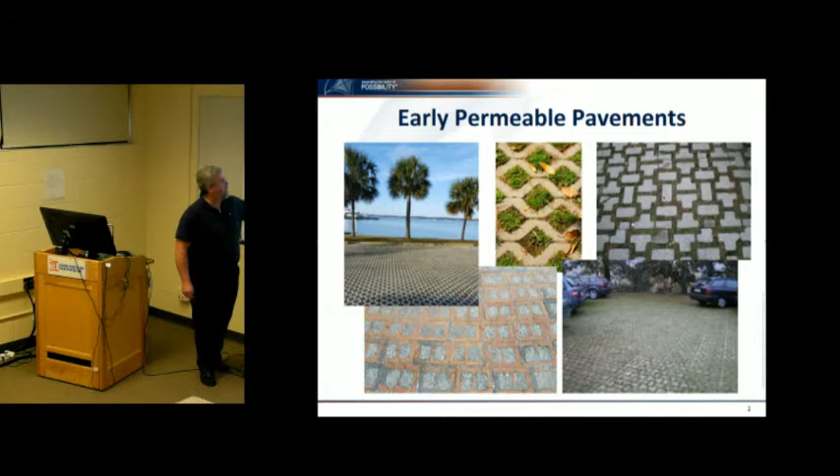Well, the stormwater industry primarily is the one that's interested in permeable pavement systems. It's not something new - it's been around for a long time. The first permeable pavement in North America was built in the early 1900s in Nova Scotia, Canada. There's been quite a wide variety of different kinds. This looks like concrete blocks on their side - this came from a hotel in Italy I was staying at once. All of these pavements are designed to allow water to go into the pavement instead of having it flow off the pavement structure. There are the primary pavement types of this in North America.

Really, you'll hear pervious concrete, porous asphalt, and permeable interlocking concrete pavements. They're basically any pavement that allows water to go directly through the pavement structure and into the layers below. It's not like the porous asphalt we put on top of a pavement structure as a thin layer, like you see in Florida where you're driving down the highway - water goes in the top and out sideways. These are pavements where water goes directly through the pavement structure into the materials below, including the subgrade, and we infiltrate it if possible and do things to help treat the quantity and quality of water. Permeable pavements basically have a surface structure that's permeable, and all the layers underneath are also permeable.

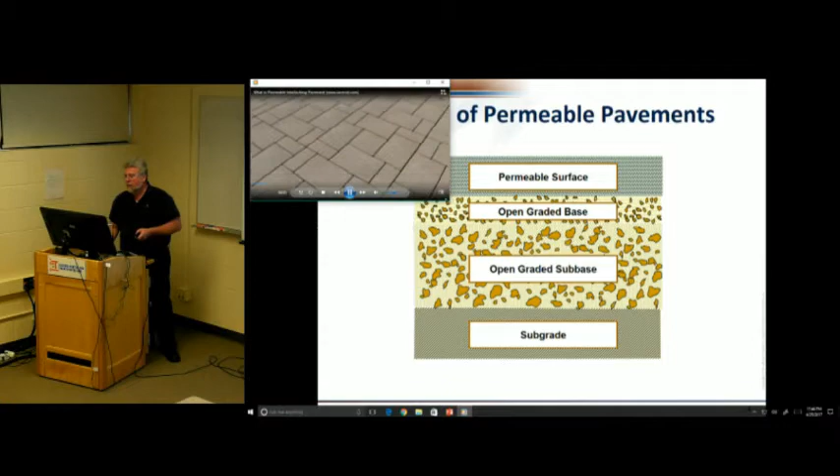So what happens when water flows on top of these - let me make this a little bigger for you - is that water flows across the top of the pavement, goes into the spaces between the paving stones in this case, or the porous asphalt or pervious concrete, ends up at the bottom of the pavement structure, and then we deal with that water through our normal design process and procedures.

We take away the small portions of the aggregates, leave it very open, 25–30% voids. We sometimes put fibers and fillers in there so we get more glue to stick the aggregates together, and then ultimately all the water goes into the pavement structure.

Here's a picture of a housing complex in New Hampshire. The University of New Hampshire has done a ton of work on porous asphalt pavements and water quality measurements, and you see a lot of these in subdivision roadways and pathways and whatnot all over North America now.

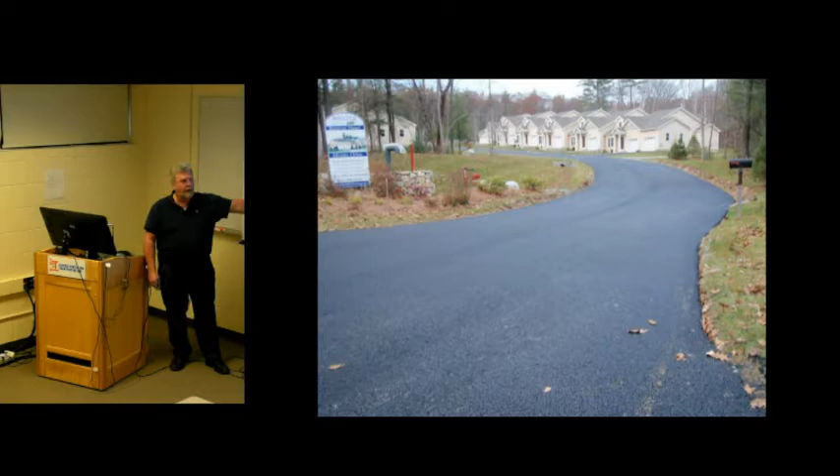Pervious concrete is basically the same thing. We make concrete, we make it as dense as possible to be as strong as possible, unfortunately not very permeable. So what we do is we take out the small aggregate particles from this.

We have additives in the concrete itself to hold water as well. If it's a hot sunny day, lots of wind out there, not a good time to be placing a pervious concrete pavement. This comes from one of the largest installations of pervious concrete in North America down in Williamsburg, Virginia.

They took a big outlet mall complex, and there are no catch basins in the entire complex, the entire area. They basically removed, this used to be a stormwater pond right here. Underneath here are these big milk crates, I call them, that are big open spaces that store water.

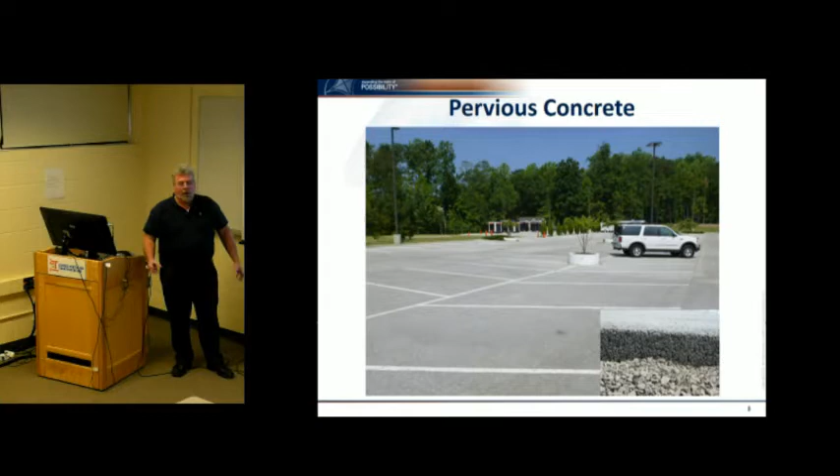All the water from all the buildings in this entire outlet mall ends up back here with a small outlet down the back here that allows it to go into a stream behind. If it doesn't get into the ground, it goes into the stream behind there.

And then we have permeable interlocking. There are varieties, tons of varieties. There's 30, 40, 50 different kinds of permeable paving stone systems. This is not permeable. The space between the stones themselves is where the water gets into it. So we've got about 90% solids and about 10% open space between these paving stones.

There are some of these that are actually made from pervious concrete. You got a question? Shoot. Yep.

The base is completely open as well. So we've got basically 25–30% voids in the base. And do stop me if you got questions as we go along here, just stop me, okay? I'm more than happy to stop and answer questions.

Another variation of this is from Colorado, Fort Collins, Colorado. They use a lot of these. They've got specifications actually that require all new construction, 25% of that surface must be a permeable surface. So it includes parking areas, roadways, everything else in the entire city.

This comes from a brewery. They're very, very sustainable. There's no water that leaves this site. They basically infiltrate the water through this. The big beer trucks that carry the beer cases and kegs leave out through this roadway here.

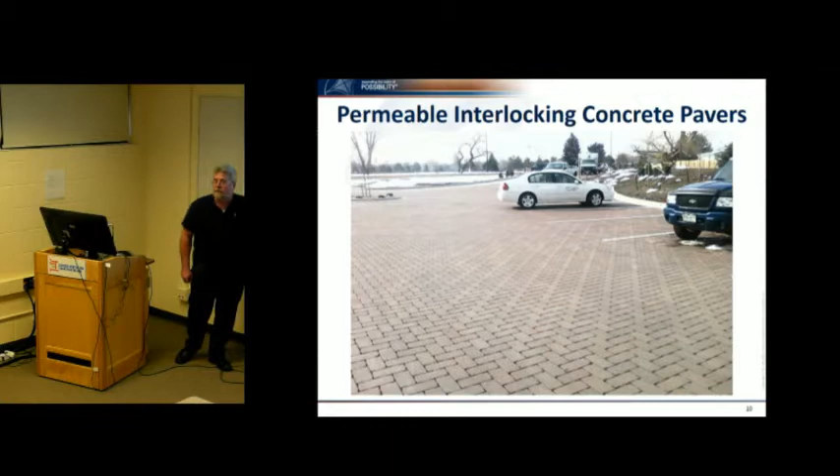And so this was built probably 8 or 9 years ago, I think probably now. I've seen it quite a few times out there.

Advantages: no trenches underneath to compact, no trenches to settle, easier to build. All the water basically from the roadway gets infiltrated into the ground, and water comes from here as well, off the top and into the pavement surface. And so we have to take care of that as part of the design, which I'll be talking about.

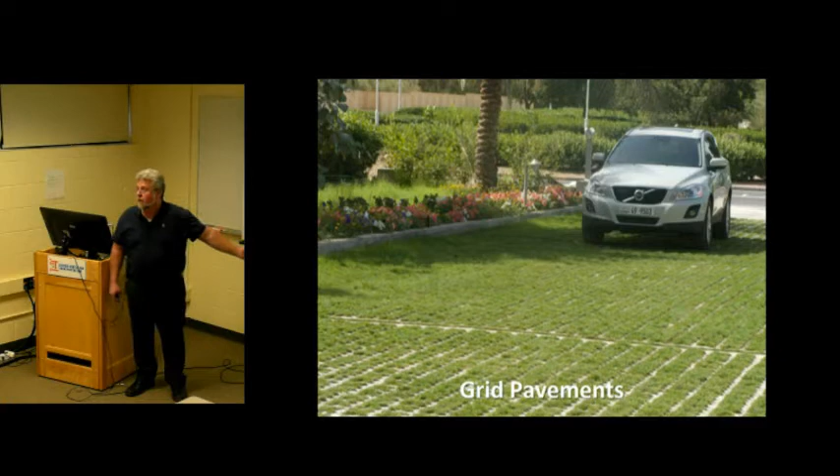And then there's a lot of other ones like this, grid pavements. These are the old daddy of kind of permeable pavements. Because it's green does not mean that it is permeable. Under here, if we've got a little bit of topsoil and some clay soil below it, it will not infiltrate water.

It's virtually impermeable. Just because you see something that's green does not mean that water can get into it. But a lot of people still use some of these systems, basically the old ways.

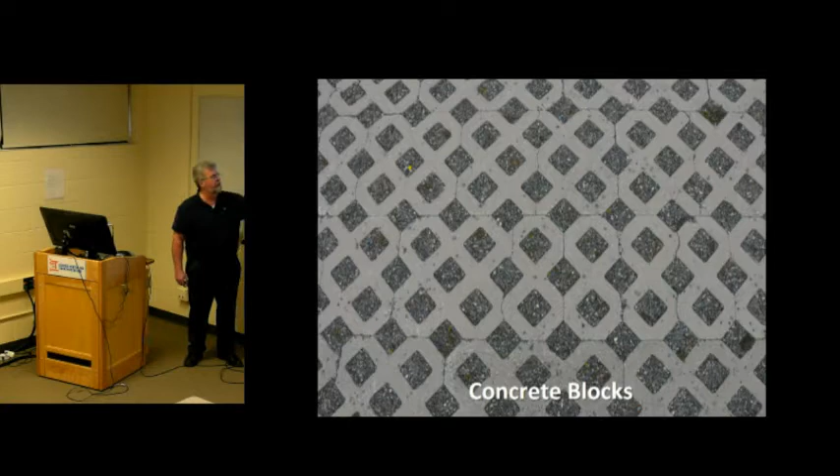You could take a box of these, and all of us here could probably in 5 minutes cover this entire room with this stuff. Once it's connected together, you cannot get it apart, it's impossible to actually separate it. So you can drive on it, you can plow snow on it, all kinds of other things. This is aggregate in the middle of it that's providing permeability to it.

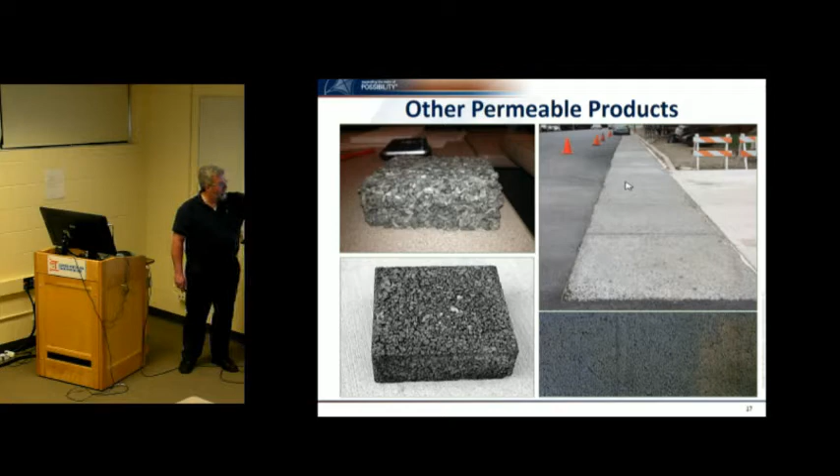There's a variety of other kinds of products, epoxy-coated aggregate materials. There are actually poured in place and precast versions of this. Some guys up in Maine and Vermont are doing a precast version of this pervious concrete and just laying it on the side of the roadway to connect it up to the drainage system. There are tons of different kinds of these things out there, some better than others. I'm not thrilled about these kind of things because when you put the blocks together, they rub up against each other and cause some of the aggregates to move up and down a little bit.

Typical application of permeable pavements - this is not on a highway. These are typically parking areas, driveways, recreational trails, things like that. Parking lot is a very common use of these permeable pavers. This is from a Lowe's facility down in North Carolina near the Outer Banks. Their entire parking lot area is basically pervious concrete.

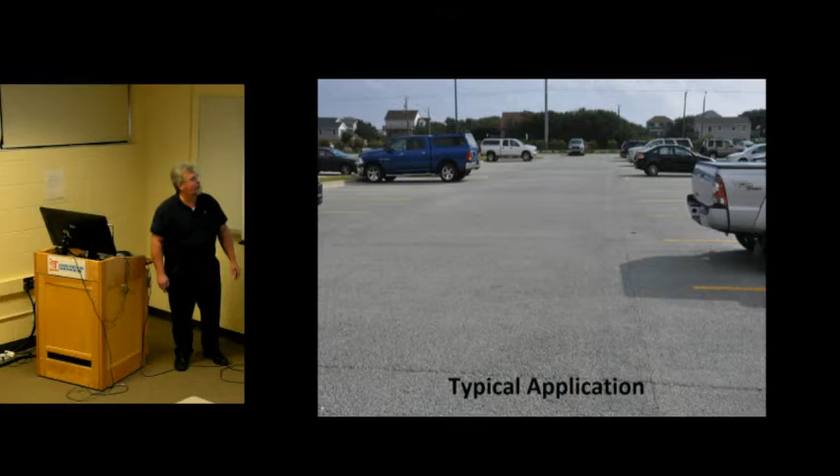You see a lot of these being used in places where you've got sandy soils, soils that have a high hydraulic conductivity, where water can get into the soils. So if you put this on top, think Outer Banks sand kind of deal, you don't need catch basins because all the water will be infiltrated into the ground below it, which is the desire of this entire pavement system. The challenge with these is getting this down uniform, making sure it's properly compacted, making sure it's properly hydrated, or what happens is you get rattling happening. So you turn your tires like this on your car, you pop out pieces of aggregate, and that can cause some issues.

Keys to a successful project - ultimately these are not suitable for everywhere. I'm constantly dealing with landscape architects and people who say, oh, I want to put permeable pavement in here and I want it to be subject to bus transit traffic. And I said, not a good idea.

I've got a project right now on the Gordie Howe Bridge, a new bridge between Canada and the US up in Windsor and Detroit. The architects sent us the plans for the parking areas and the heavy truck zones, and they're all permeable pavements because they want to be sustainable. Well, I'm the guy that says, bad idea, you shouldn't do that. So we need to look at the sites and what conditions are there to determine whether or not it makes sense.

Then we've got two things to deal with: strength and hydraulic design. We've got strength, we have to make the pavement thick enough to handle the loads, like any pavement design. And we've got hydrology, we have to figure out how to get the water in, and then what do we do with it once we get it in? Does it go into the ground? Do we have to deal with it elsewhere? Do I have to get some of it leaving the pavement structure? How do I do that?

It's not rocket science. This is not really complex to do. It's easy to write specifications, but it's new. It's new to North America, mostly probably the last 15 years or so. In Europe, they've been doing it for 40 years. But what happens in North America is I do a job in Boise, Idaho, and I see their specs, and I say, where'd you get the specs? Oh, I got it from Orlando, Florida. I went to Google, whatever porous asphalt specifications. And they just take it and put it in a project and want to build it there. Well, the conditions are not the same. There are really good guide specs from the industry out there. People stealing things off of Google just leads to a lot of problems after the fact.

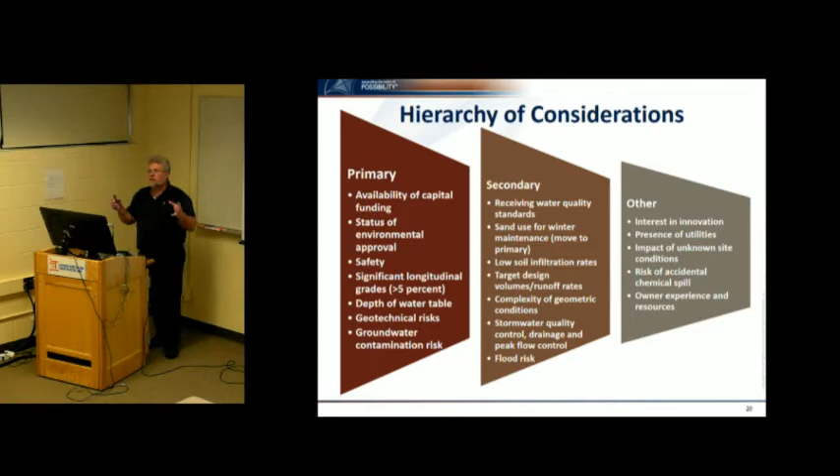So we came up with something like this, which is modeled after actually a matrix in the AASHTO design guide that talks about primary, secondary, and other considerations for a decision-making process. And we've listed here all the things that are important to a permeable pavement, including things like geotechnical risk, depth of water table, environmental approvals, and volumes of water and things like this. And we've taken that and turned it into a matrix. Engineers like matrices and spreadsheets and things like that. So these are kind of telling people when they should and shouldn't do something particularly.

So this is the matrix that came out of that, which was a decision tool to determine if you could consider using a permeable pavement for a highway shoulder on the side of the roadway.

We had our primary, secondary, and tertiary considerations, and we put weighting factors on all this. At the end of the day, it gives you guidance as to whether or not you can build a permeable pavement in a particular location. This makes the engineers happy, and it's something we can use to explain to councils, city people, designers, and architects why a site may or may not be a good candidate for a permeable pavement structure.

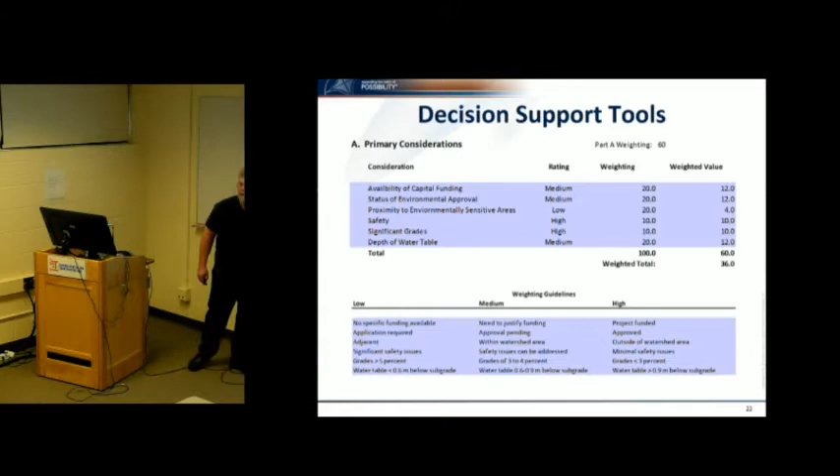Here's a blow-up of a couple of the slides. We've got a weighting scale, and guidance that tells you what low, medium, and high risk means—for example, if you've got a grade over 5%, it's low risk, et cetera. So it walks you through the decisions, and you decide whether or not it's a good idea to build a permeable pavement there. Then we score them all: primary, secondary, other. In this case it came out with 65.6 out of 100. I think 75 was the criteria for a yes, that it works well, and it gives you an idea of whether or not you should do this.

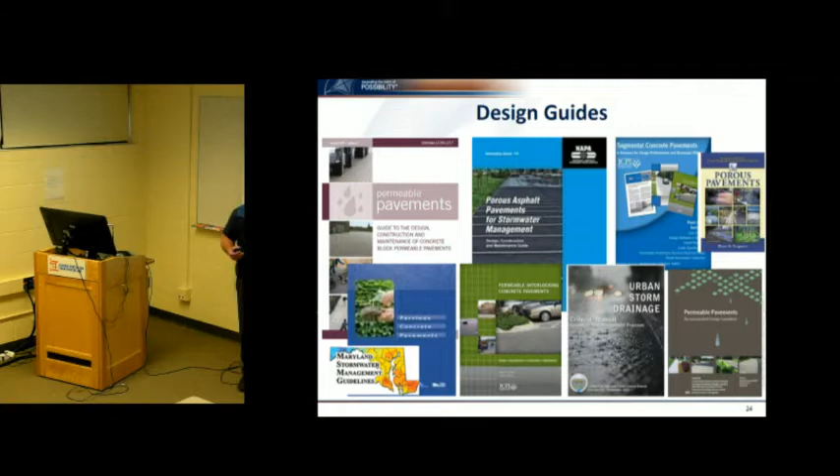There are tons of guides out there about permeable pavements—industry guides from the concrete industry, the paving stone industry, groups like ASCE. This one is from the Environmental and Water Resources Institute of ASCE. They got a bunch of really good people together and came up with a high-profile manual to give guidance on the design, construction, and maintenance practices of permeable pavements. So there's lots of stuff out there to help people understand the do's and don'ts of permeable pavement design.

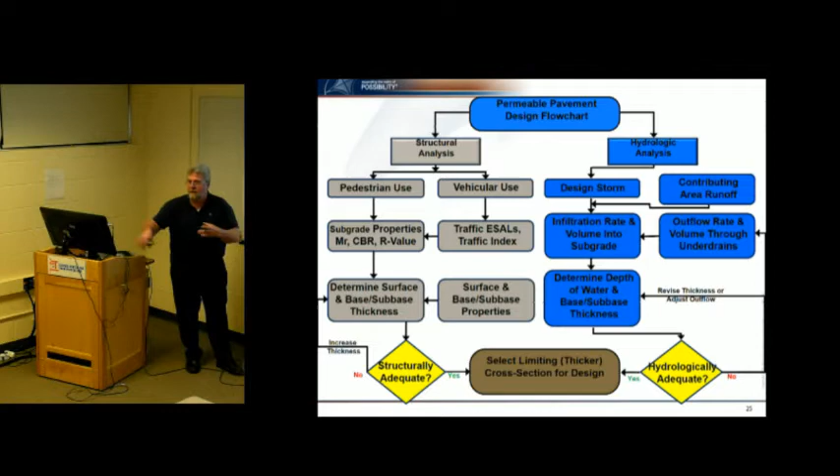This is the basic process. What we're looking at here at the top is a design flow chart with a structural side on the left and a hydrologic side on the right. The structural side is very similar to building a conventional pavement with a few twists. The hydrologic side means, in addition to making it strong, I have to make it so I can get water into the pavement and decide what to do with it once it's there. Ideally, when you get to the bottom, you have a pavement structure: here's how thick it needs to be to handle the traffic, and here's how thick it needs to be to handle the water. So maybe I need a thicker pavement for traffic than for water, and I want to optimize this. The best pavement is one that's just thick enough to handle the traffic plus just thick enough to handle the water, at the least cost. That's basically our goal in designing these systems.

There are a whole bunch of inputs. I won't go through them all in detail, but the first thing I ask people is: why do you want to build a permeable pavement?

A good example was Thompson, Manitoba—think up by Hudson Bay, about 1,000 kilometers north of the American border, north of Minnesota. It's a school, a university campus, and they wanted to build a permeable pavement. So I asked them, why do you want to build a permeable pavement? They said, we want to be green. Okay, that's nice, so let me explain where you are: you're in Thompson, Manitoba. It doesn't rain here—they're in a northern winter desert kind of climate, getting barely any rain a year. I asked again, why do you want to do this? They said, because we want to be green. Okay, fine, you want to get LEED Silver certified—that's fine, whatever you want to do. So I told them you're not going to get any water into the ground because the ground is sloppy, nasty clay material—it would take 100 years to infiltrate that much. So I asked, can you design this? Of course I can design this. So what are you going to do? I'm going to dig a giant hole in the ground and fill it full of rocks, then take all the water that doesn't get into the pavement and put it in that big hole.

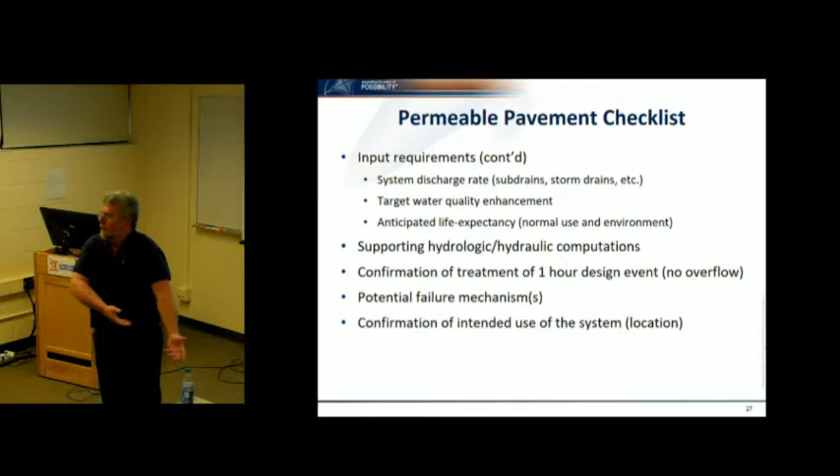If we're sending water out, what are we trying to do with it? When you drive, you got water that's moving. So if I take this bottle of water and put a bunch of dirt in it and shake it, it's going to be nice and brown. I sit it here, and stuff's going to start falling out of solution. You've got particles in the water. Gravity works, right? The longer I leave it sitting there and not moving, the more stuff is going to come out of solution. So I'm taking care of what's called the total suspended solids. But if this water is moving, it's always going to be dirty. So the whole point is to get the water to slow down and get the suspended solids out of it.

There are guidelines and rules here that talk about what's called first flush. When it rains, you've got to take care of the first inch of water and not let it leave your site. So there are rules that say every time it rains, the first inch of water -- if it's a half an inch, it's got to go on the ground. If it's an inch, all on the ground. If it's an inch and a half, an inch has got to go on the ground, and the other half we can send someplace else.

So there are guidelines -- everybody's got guidelines, everybody's got something different right now. It's driving me crazy because there are so many different kinds of guidelines from different agencies with different goals. There are no real central goals.

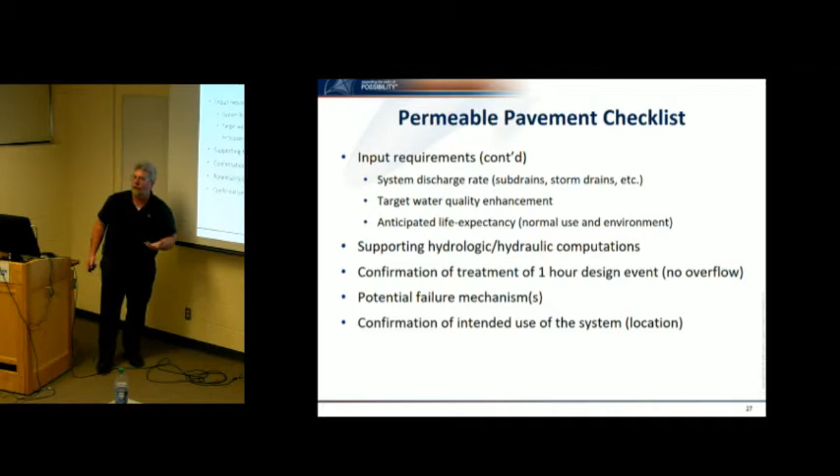Geometric details, all kinds of other things here. We want to know, is it flat? Is it curved? Is it stepped? Is it an alleyway? Does it go down 5% slopes? Do I need drains underneath this? Are there curves in it? Are there utilities I have to deal with? All of these things are part of the geometric design and details. Is there frost? Is it cold? Is it going to heave or not, potentially? All of these things are important.

And if I've got contaminants I'm trying to take out of the water as well. Then there's things about how fast does the water go into the ground. If it's sand, like this -- if it's clay, really slow. I can make it go faster in clay if I want, by roughing it up and making trenches and boreholes and things like that.

Clogging the surface -- so I've got an open structure and a bunch of pine trees dropping needles on the pavement surface. Are these going to eventually clog up the surface of the pavement? Well, we designed for this stuff so it doesn't affect the bottom end at the end of the day. So basic steps here: evaluate, can I do this? Does it make sense? Two, why am I doing this?

Let's talk about the benefits we can potentially gain from this. Most of these are environmental, most are stormwater related. The bottom line is there are so many things, if we deal with stormwater at the source and not at the treatment plant side, we're saving a ton of money. If I'm reducing the size of my stormwater ponds, reducing the amount of water that goes to a stormwater plant for treatment, reducing the water sitting on the pavement surface so you get better visibility and less water spray, there are all kinds of benefits associated with permeable pavements that are not pavement related, but rather water related, at the end of the day.

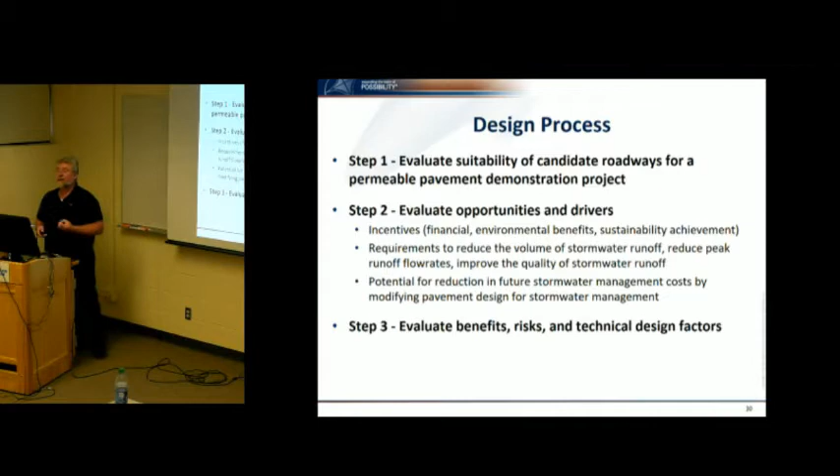All those considerations I talked about, the primary and secondary ones, this is what we do. This is from Berkeley, California. The council in Berkeley asked us to do a permeable pavement design demonstration project. They said, here's 8 candidate roadways, and I want you to pick one of those 8 and we're going to build our permeable pavement on it. So the matrix that I had was adapted for Berkeley, California, since they have different needs at times.

We went out and looked at each of these locations, looked at the cross sections - these were all existing roads they wanted to turn into permeable pavement, basically rehabilitating the road, digging it up. We looked at the areas around - what's on the sides, are there trees or other roads dragging water to the pavement surface? What's under the ground? If I've got old utilities under the ground, I probably don't want to use them for my demonstration project, because if I get a water main break or something, that's not a good plan - your demonstration project's going to go up like crazy.

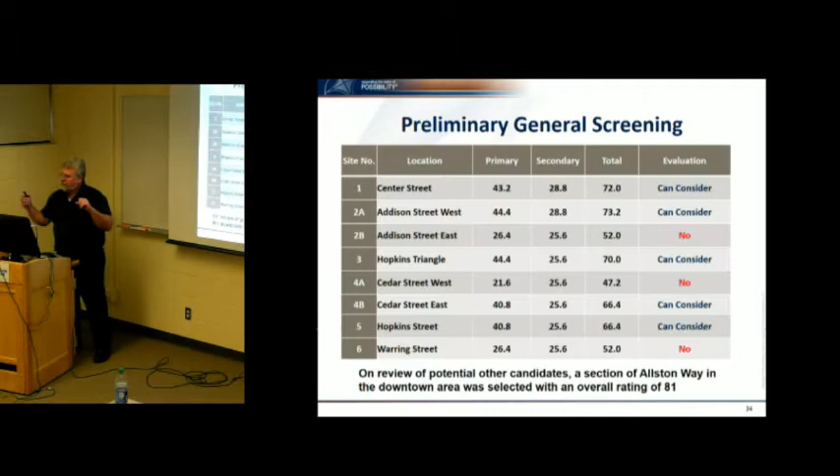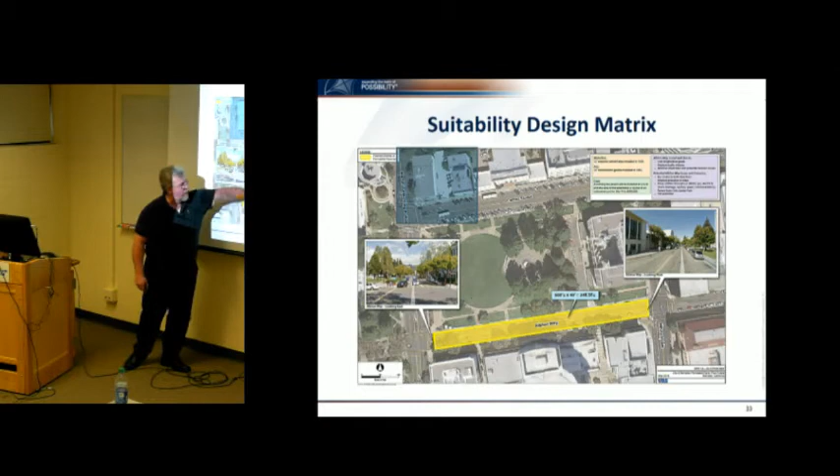So we look at areas and where the water's coming from, and others like this one - we took all 8 of those locations, put them through our matrix. All 8 of these locations they picked ranked in the 40s to 60s - not really something we could consider. So they came back and asked why. Well, because there were all these things wrong, and we explained why, gave them all the details - one's a major bus route, one's got tons of dirt coming in from a construction site, and things like that. So ultimately we ended up picking Allston Way, near downtown Berkeley. It's got lots of area that dump water onto the pavement, but it met basically the rest of the criteria, giving it a relatively high rating of 81.

So that's what they did - we said okay, good, we're going to build Allston Way. This is Allston Way. We have to look at the water that falls on the roadway. These are sidewalks against the school - all the water there goes this way, and this part of the water here goes this way. So I have to build this permeable pavement to handle all the water coming into the road from different locations.

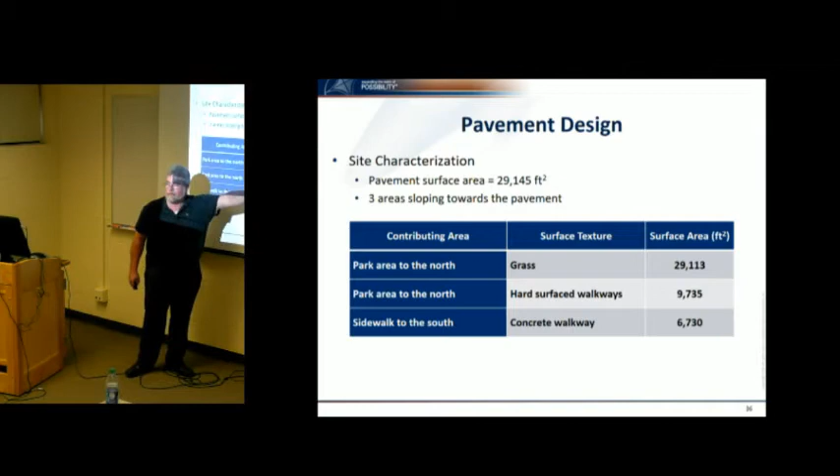So we go and look at this, and those are the contributing areas - these are the additional areas. We've got the pavement area, 29,000 square feet, but I've got 29,000 square feet of grass contributing water, 10,000 feet of hard surface walkways, and 6,700 square feet of other concrete walkways. I've got to deal with all that water - it's not only going to take the water that falls on it, but also all the water that comes off of it from the areas around it. Remember, grass doesn't mean it's going to infiltrate water - it doesn't go in, it goes off or it evaporates, and that's where the water goes here. So we have two tracks basically: a structural track and a hydrologic track.

Let's talk a little bit about the structural track.

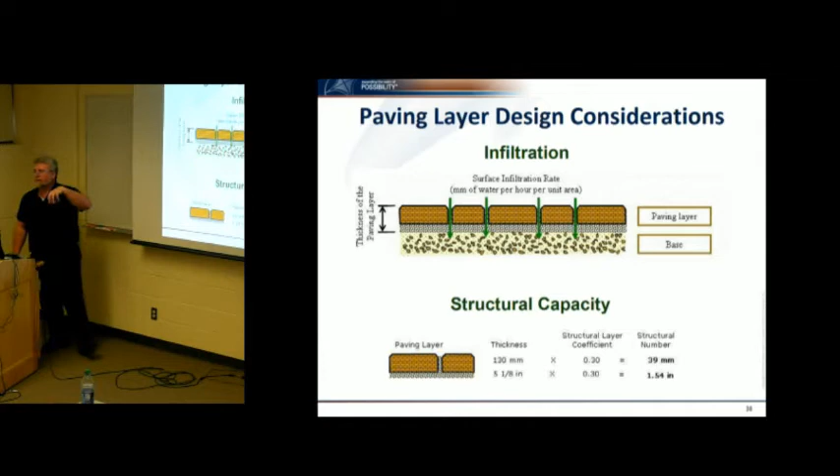We need to get water into the pavement, so we need to use a permeable surface. In this particular case, it's paving stones, and the spaces between them let water go in. On the structural track, I need to come up with a structural design, which I'll go through in more detail further on.

To determine if we can get water in, we test other pavements to know what the permeability is. I've got a project starting in a couple of weeks with a manufacturer of paving stones building about 10 foot by 10 foot square areas of 8 or 9 different kinds of permeable paving stones. We do an infiltration test, a permeability test, using plumber's putty and a known ASTM standard - there's one for concrete, one for paving stones - where you dump water in, time it, and find out how fast the permeability is. Something like that will be roughly 4 feet of permeability an hour going into the ground.

It doesn't rain that much. The highest rainstorms in a 100-year storm in the U.S. are roughly 12 to 14 inches of rain in 24 hours, not in an hour. So these pavements are massively permeable.

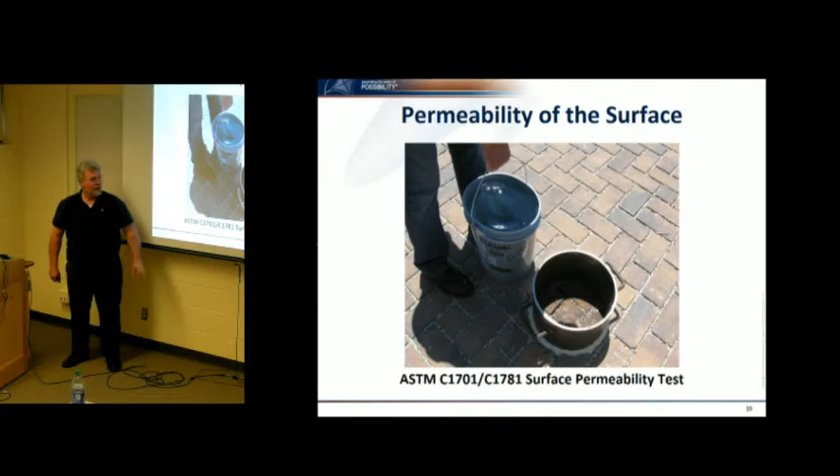If you don't have real pavements to test, we build stuff in the lab - a permeable pavement system. We pour water on top and simulate clogging by getting grad students to dump dirt on there with toothbrushes and work it into the joints, all those wonderful jobs you get at a university. This is at a university, by the way.

We do permeability tests and look at the change in permeability over time. As I try to clog it, it goes from say 200 inches an hour down to 190, 180, and usually it clogs asymptotically flatter around 90% loss of permeability, so around 10% of the 200 inches I started with. So over the next 25 years I expect to lose permeability - that's okay, I designed for this. I get 20 inches an hour, which is way more than needed for the biggest design storm in North America, so that's not an issue.

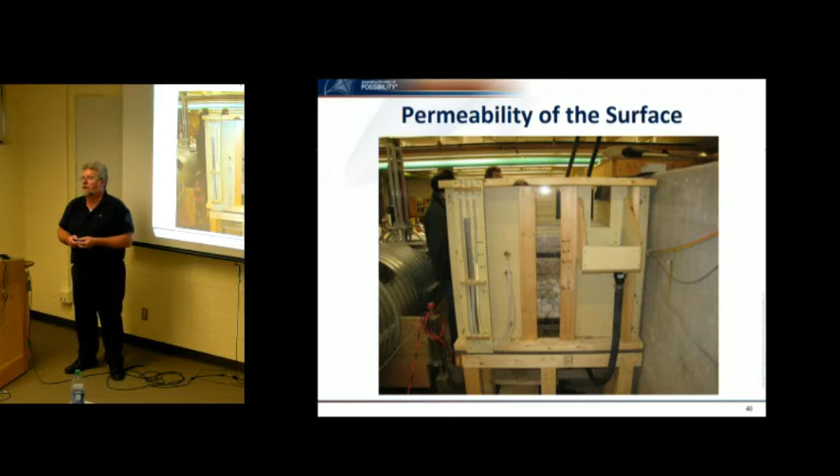We look at the permeability through aggregate materials and do a mix design. People have done work on mix designs in asphalt and concrete - well, we can change our mix design. This is something people don't do enough. Why have a massively open aggregate structure if I only get 4 inches of rain a year? If I'm in Lubbock, Texas, I do a different mix design than if I'm in Houston, Texas. We change the mix design - I can give up some permeability to get more structural capacity, a higher modulus, and it makes more sense because it lasts longer. It's a give and take relationship.

Hydrologic design: water goes in, water goes out. Water comes down from precipitation, and we get water from surrounding areas like the parking lot and the park we saw. Some evaporates, some runs off the surface, and a lot hopefully goes into the pavement structure. If we get it into the ground, that's really good. If we can't, the water builds up and we need to get rid of it - we don't want it filling up over the top of the pavement. So we want to control it. Most agencies specify that when water gets into the permeable pavement, you can only keep it for 24 to 72 hours.

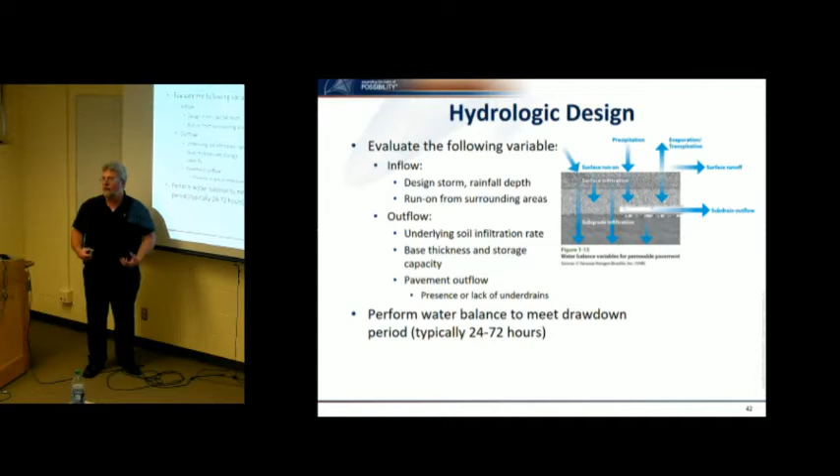They don't want water sitting someplace where you may have mosquitoes potentially growing, and ultimately you want it to flush out of the pavement structure. Delaying it by 72 hours is huge when it comes to storm events and water downstream and things like that. So that's the basic goal from this.

We call this the reservoir course because it's where we hold water. This has porosity of 30 to 40%, let's call it 33%. That means I can hold 4 inches of water with every 12 inches of aggregate I put in. So it's 33% air voids, meaning I can fill it up.

Ultimately, we need to know about the ground, the subgrade soils. How fast can I get water in here? If it's raining on here and it comes to here, what do I do with it? How fast can I get it into the ground? If it's sand, like this. If it's silt, slower. If it's clay, it's going to take a long time to get into the ground.

So we have 3 basic kinds of designs. We have what's called full infiltration.

No, I'm just not going to answer that. The phone's ringing. It's okay, don't worry about it, it'll stop.

Anyway, so we get full infiltration. This means we're trying to get water into the ground. All the water that goes in the top has to go into the ground.

This word I absolutely hate as an engineer, when the architects want an uncompacted soil.

What do you do when you're building a pavement? Beat the crap out of the subgrade so that we can make it work. I don't know how to hang up on this thing, but hang up. Ignore—oh, that was obvious. Need an engineer with a PhD to show me this, eh? I know, I know, sorry man.

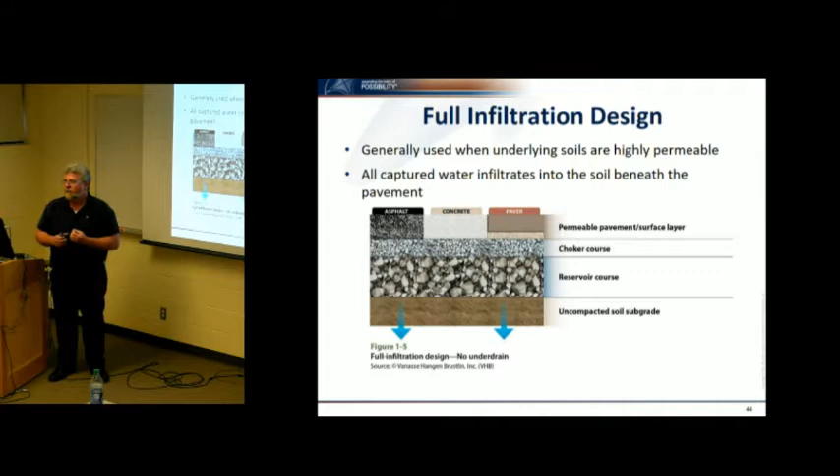You can build infiltration trenches. You can do holes, you can do that big hole I talked about up in Thompson, Manitoba, and things like that to make it work. So there's no need for this kind of stuff.

Full infiltration design, those are just the formulas of water stuff, and I'm not going to go through that. There's a new standard coming out from ASCE. I've been the chair of this committee for 4 years now, and we're finally going to get into the last steps of issuing a design standard to the public, which has all of this stuff and details in it.

So it's basic water analysis, looking at the total volume of water, where it's coming from, how it's getting there, and then making sure that we don't leave it in the ground too long. The ASCE standard has all of this detailed examples and stuff of how to calculate it as well.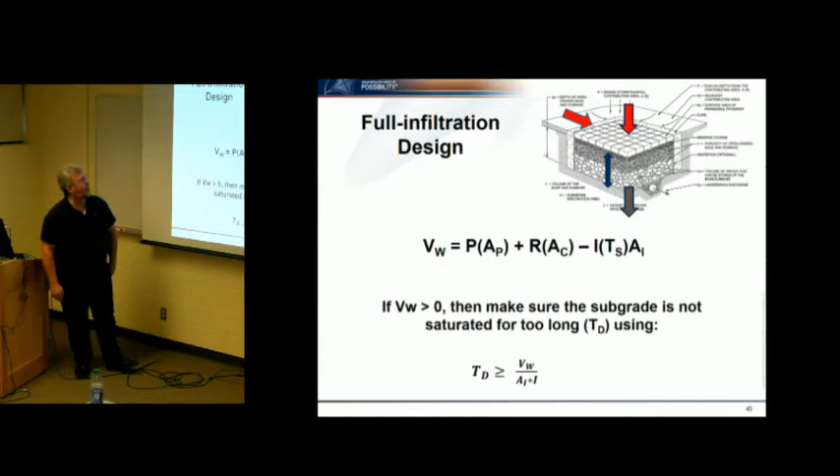Then we have what's called partial infiltration. Partial infiltration is basically where the water goes in, we get some going into the ground, but it doesn't all go in, it can't all go in.

So if water builds up, at some point in time we want to take it out. Usually we don't bury this guy in the aggregate, we bury this guy in the subgrade, and then to control the height, I turn the pipe up and I leave the outlet higher. So it builds up until it gets to the outlet height, and then eventually it comes out of the pavement structure. So this is a little bit more detail, I'll show you a couple pictures of that a little bit later.

Then so the partial infiltration design, same kind of thing. It's about water balance and where the water's going and how much water we store here. At what time do you actually let it go into the pipe and leave the pavement structure?

I said I don't do it here. We usually put the pipes down here so they don't have to. If you do it in the middle of the aggregate and construction, you've got a chance of damaging the pipe, so we don't want to do that.

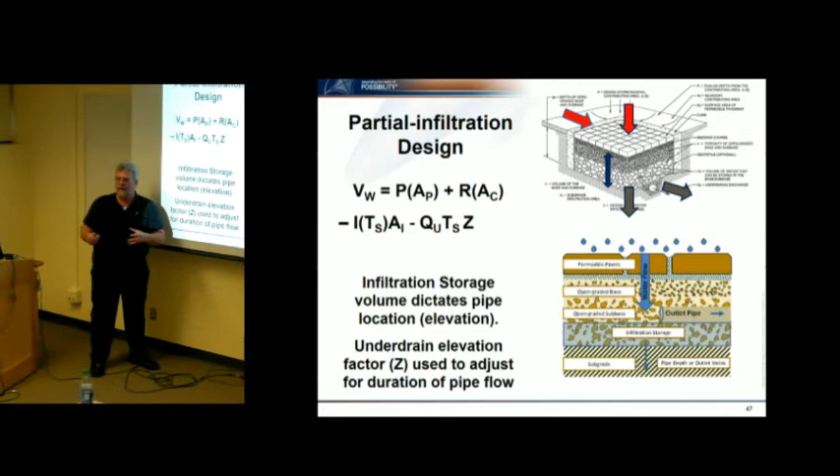Then we've got a no infiltration design. This is popular for brownfield sites, areas that are contaminated where you don't want water in, or places like Texas and Oklahoma where the soils are very susceptible to moisture changes and will actually heave based on moisture changes. Or quite frankly, if you want to save the water and use it to water the plants.

A lot of people will do these designs because they're into water capture. You basically capture the water in the pavement. Usually you'll have a cistern and a pump downstream so you can pump the water out and use it to feed the grass and plants and all that kind of stuff - gray water reuse. It needs a drain to get there, some way to get to the cistern and things like that.

So this is the no infiltration design, and the equations are pretty simple for a no infiltration design as well. I won't go through the details with respect to time and whatnot.

So then what you've got to do is, okay, I know how to do the calculation of water, where it goes in and out. I need to still do structural design, but we do things like defining the area of our permeable pavement, what size it is, and then look at all the contributing areas - the park, the concrete sidewalk, the other sidewalk - and look at, if this hallway is my contributing area, how much water is going to land there?

What kind of surface is it? Is it rough or smooth? Does it have a slope on it? How long is it going to take for it to come through that door and get onto my permeable pavement? So I need a water balance, right? And I do that for grass, which is different than asphalt, different than concrete, different than trees and all the rest of this stuff.

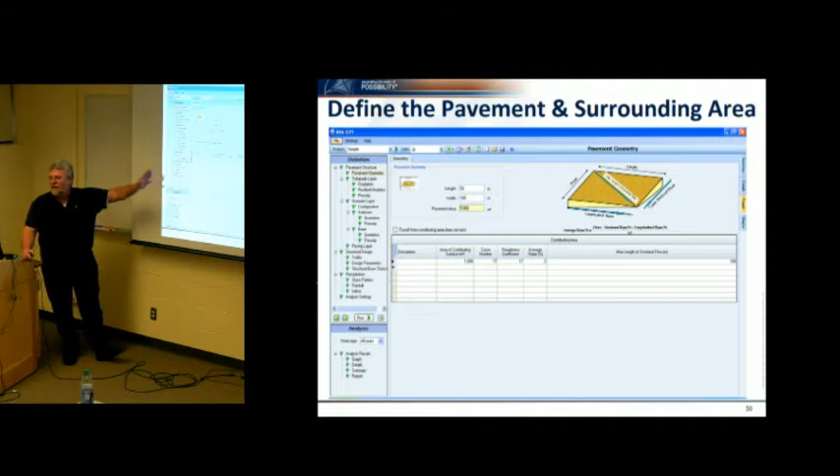This is a computer program developed by the Interlocking Concrete Pavement Institute folks that basically allows simplistic permeable pavement design for architects and whatnot.

This is the stormwater pattern - how water gets to your surface when it falls out of the sky. This is showing you percentage of rain over a 24-hour period. The dark red line is most of North America, so Champaign here would be it.

It would start raining, rain slowly. After about 8 hours you've got 10% of the rain occurring. Then all of a sudden you get a major storm that dumps 40-50% of the rain in 30 minutes, and then it slows down at the other end. This is more like Seattle, where it kind of rains slowly and keeps raining and raining.

I need to know this because I need to know if I can get water into the pavement structure. So we usually simulate this at tenth-of-an-hour intervals, or 6-minute intervals, something like that, so we've got a water balance happening on a continuous basis. This is a really simple, like $100 program that they've sold 5,000 or 6,000 copies of to architects who use it to design structural and hydrologic designs.

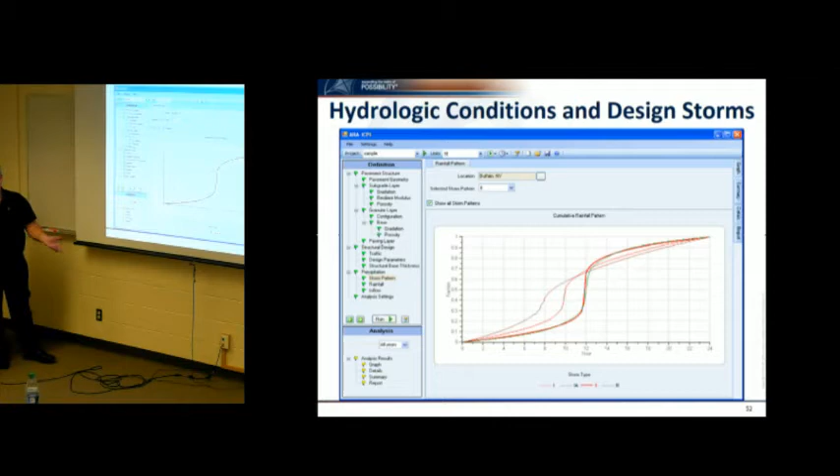And then we basically calculate how much rain comes down, how much is inflow into the pavement structure, what comes from the catchment area, to give you a total inflow, and then we model the water.

How much water gets in over time—5-year storm, 100-year storm—and it gives you 24-hour total cubic feet, cubic meters kind of deal. Then we go through and do a whole bunch of other things.

We look at how much water builds up in the base with time. So this is showing you how much water is in there for a 5-year storm or a 2-year storm up to a 100-year storm. It's going to be about 5 inches deep in the pavement structure.

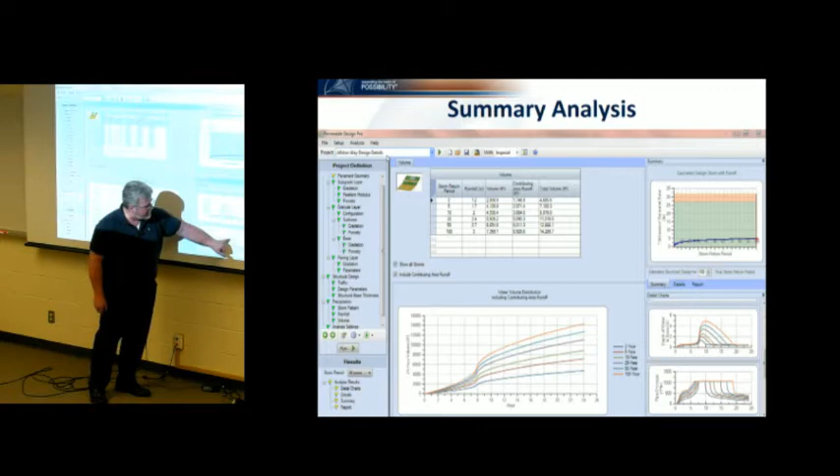These are subdrain pipes. We put them at certain elevations to take water out at certain times. When it's like this, it means all the pipes are running full tilt, all the water is full in the pipes kind of thing. So these are basically some hydrologic tools to do that.

And then there's not just the drainage that happens in the pavement and out of the pavement. We call this supplementary surface drainage—things like cuts in the curb here. If water's coming so heavy it can't get into here, it will actually go through there and into here.

This is a really, really good site because this is that Rock Creek campus in Portland. Back here, the parking area is all asphalt dense and permeable pavers. All of this area here drains down here, and that right there is this. And then there's a stormwater pond here.

So the water has to infiltrate here. If it can't, it goes here, infiltrate here, it can't get there, it goes down here, tries to get into the ground, can't get into the ground, ends up in this one pipe, goes down this ditch here. Plants now are like this tall and they all suck water and use water up. And then at the end here, it goes into the stormwater pond if there's water in that ditch.

I've been out there a half a dozen times over the years—I do a lot of stuff in Oregon—and I've never seen water in that stormwater pond yet. It's grass, green, dry. So that's a really neat stage design to allow all the water that gets onto that site basically to infiltrate into the ground. So nothing actually leaves the site.

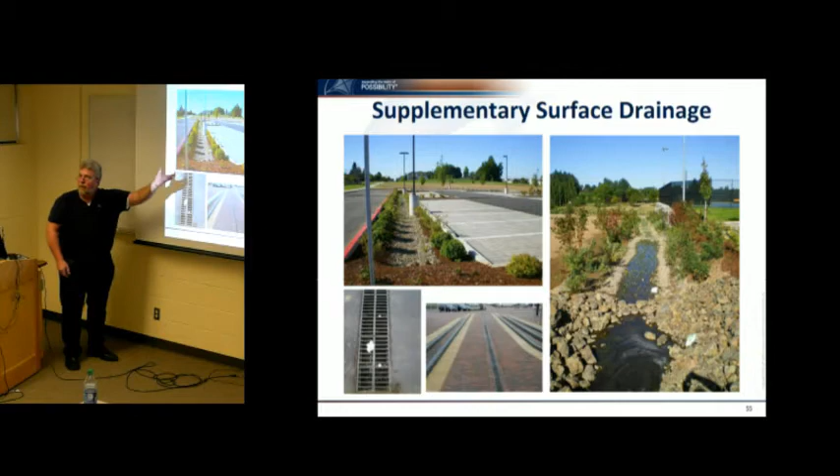So they've got a set of tennis courts right here on the back, and they really could have actually made another set of tennis courts there, because there's no water going into that pond ever in the last 7 or 8 years. So again, more land use, better land use, and it's going to have a financial benefit to people.

This is from Tennessee, this is Franklin, Tennessee. My sister-in-law lives there, and I was at the bank. So it's one of these banks, you know, pull through, drive through banks and whatnot.

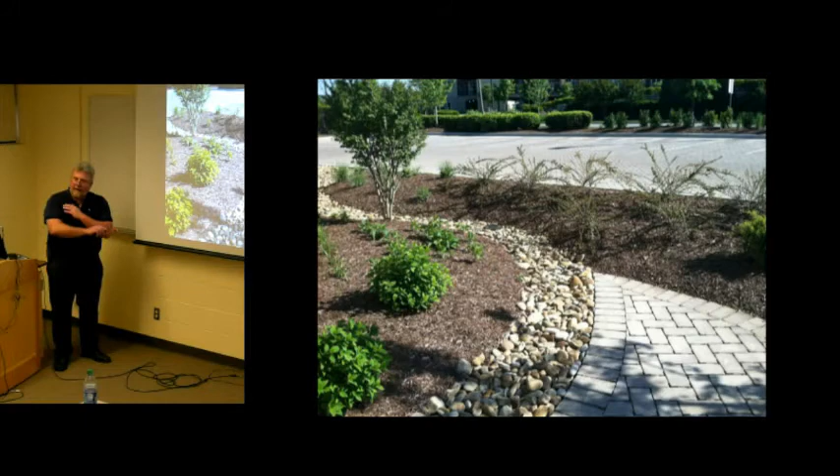So they've got permeable pavers all around it, and they've got basically supplementary drainage here. They've actually got a chair you can sit on here, and water basically gets in. If it can't find a place to go, it goes to the lowest spot, that little drain down there. I've never seen two of these the same—not two permeable pavement sections in any project myself the same at all.

Here's one from England, the UK. Entire subdivision, not a single catch basin in the subdivision. All of the driveways, all of the parking areas are permeable. All of the roadways are actually regular asphalt, and this is their urban stormwater pond.

So I was taking pictures of this. A lady comes out of her house and says, what are you doing? And I'm explaining I'm taking pictures of this. She says, well, let me tell you, it's a wonderful thing because all the water doesn't come in. And I said I found this really amazing. She said when they first built it, there was no fence around it, and they thought it was bad for the kids, so they made them put a fence up. And I said, lady, have you ever seen water in here? She goes, no, I've been living here 20 years, never seen water once.

So I said, obviously this thing here doesn't get used much, right? And the developers were awesomely happy because they got to build, he told me, 8 more houses on this site because they dealt with all the water—you know, and the roads, no bumps and trenches and things like that. It was absolutely amazing. So, quick version of the structural design.

Most of you have probably seen AASHTO structural design stuff, not far from down the street in Ottawa, Illinois, done years ago. There are 2 methods here that we're going to show you. One is first the AASHTO method.

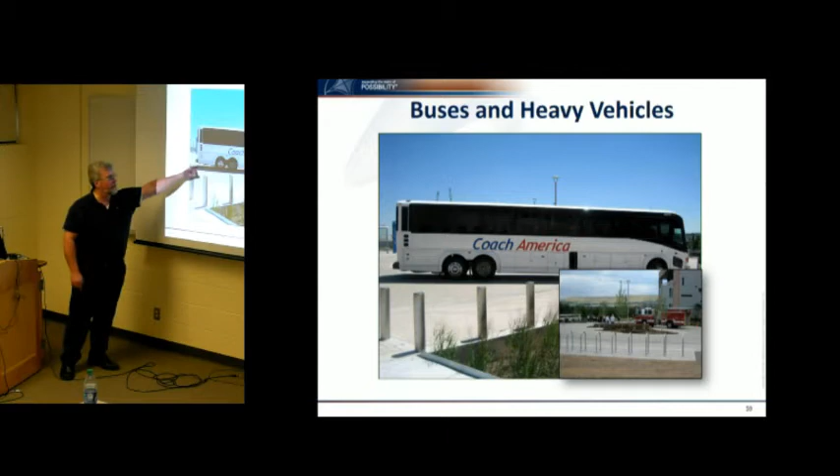Basically just heavy vehicles. Your cars mean nothing to pavement design. We don't care about motorcycles and cars, they're irrelevant. We care about these guys and these guys, these big guys. We basically take those, turn them into ESALs, equivalent single axle loads, plug them into the AASHTO design equations.

And calculate ESALs. So this software allows you to say, is it a roadway or a parking area? If it's a parking area, pick one: cars and light trucks, or cars and occasional heavy vehicles. It'll tell you how many ESALs the design is for and do a design.

If you say it's a roadway, it'll give you this. Tell me about the design life and the AADT, the traffic amounts, and how many days a year do you have traffic on it, comes with this. Calculates ESALs. This was released in 2010.

When this thing hits 600,000, a yellow flag comes up under traffic and says that's a lot of traffic for a permeable pavement. When it hits 1 million, it shuts itself off. It won't let you design a permeable pavement for more than 1 million ESALs. So that's a limitation. Back in 2010, that was deemed to be good practice.

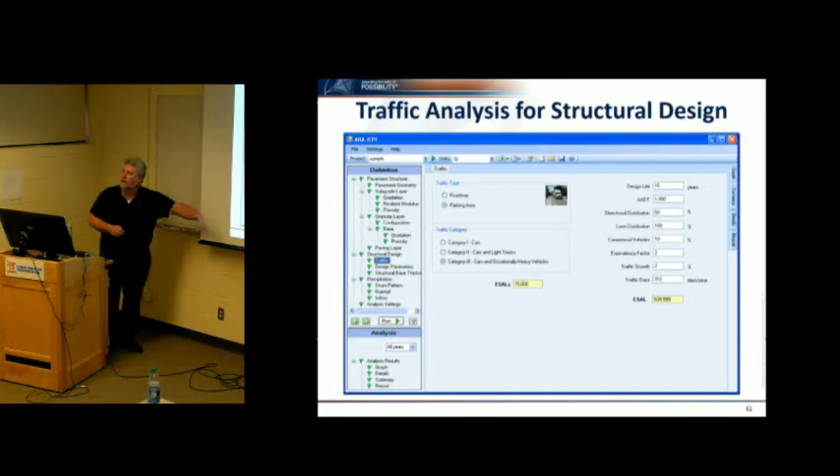The Brits now design for 10 million ESALs, and I quite frankly believe you can design one for any level of traffic at all, provided you know what you're doing. But again, these are mostly architects that do this, and we know architects don't know everything about engineering really, even though they take engineering classes, so we need something to guide them to say, don't be stupid, right? That's the whole point of this.

We need to know about the resilient modulus of the ground, the stiffness of the ground. Well, if it's wet, I need to know how long is it going to be wet? Because wet is bad. My CBR just went down to 3 or 2 because I got a wet subgrade all the time and it's crappy clay. And so we need to know stuff about that.

We need to know all kinds of things and how we get resilient modulus. Bottom line is that it's resilient modulus. All the designs are resilient modulus. There's no design really that goes through a CBR and stuff like that. It's all converted or came from resilient modulus in the first place.

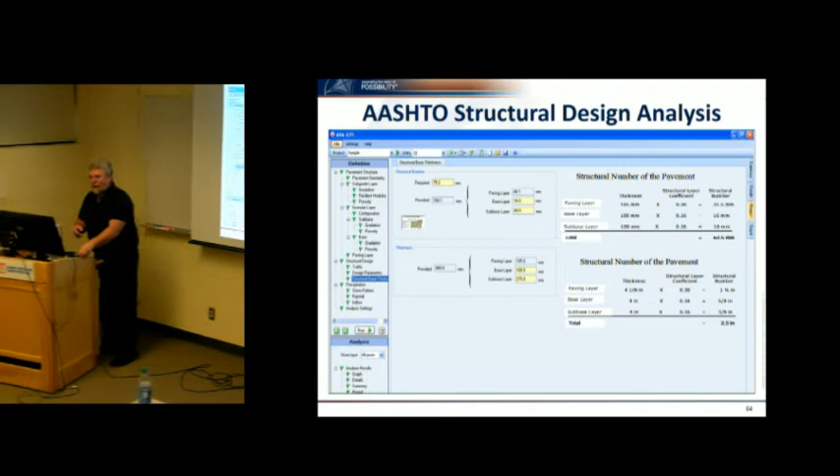So basically, just a couple of inputs on here on how to get that value. And then it's a straight AASHTO design that says, give me a structural number, what's required, what are you going to give me in terms of pavement structure, calculate the layer coefficients times the thickness values. If you're used to doing this kind of design, you'll know that paving layer—asphalt, concrete, pavers, whatever—usually is 0.42-ish. It's discounted because we have basically normal paving stones, in this case.

Normal paving stones have got sand in the joints. When you put the sand in, it's about 2-3 millimeters in thickness. You put them together, you pack the crap out of them, and I can't do this—I can't move the paving stones. It's like 2 pieces of sandpaper on each other.

To make that permeable, I have to open up the joint. So I make the joint wider. And I put little bars on the paving stones so it keeps them wider. Then in that joint, I put aggregate, 3/8 inch stone chips. I can't put sand in—sand's not going to be permeable enough for me, so I put chips in there.

The chips don't give you the same shear friction that you would when you have sand particles touching each other, and so we lose some strength of the pavers. Same thing with the asphalt and the concrete—they're not the same strength because we've got open graded aggregate making up that strength. And then the layers below them are also open graded aggregates, and so they also may have different values associated with them. So, AASHTO designs.

AASHTO is like the simplest design on the planet. I can teach you how to do that in 15 minutes. The rest of the world thinks it's pretty funny that we do pavement designs using the AASHTO method, right? Everybody's using stress-strain and all the rest of the stuff. AASHTO is like, you do what? Seriously? No, we haven't done that since ever, you know? And so, same thing with the paving stone industry.

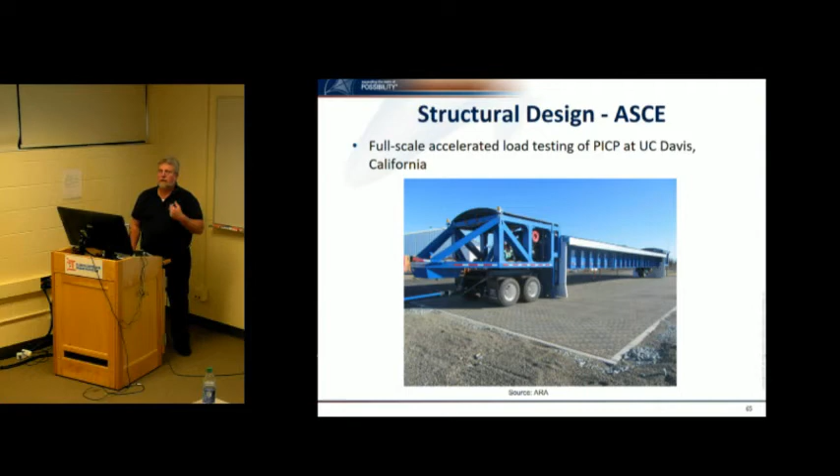People asked about building pavements with more than a million ESALs. This work wasn't far from the accelerated load equipment at UC Davis in California. They got the Concrete Masonry Association of Nevada and California and others together to make this ASCE standard, wanting something more mechanistic than simply using layer coefficients times thickness. A couple years ago, they built pavement sections with different thicknesses of base and sub-base and did accelerated testing back and forth over them.

They looked at primary modes of failure. In this case, with paving stones, it's rutting. The paving stones themselves are very high strength, 8,000 PSI concrete.

You know how hard this is for me to speak in PSI? You should appreciate this because I'm a metric guy. So I'm doing this for you, okay?

We'd allow an inch of rutting, 25 millimeters. We tested them dry and wet, and when you've got paving stones together with coarse aggregate and lots of friction, when it's dry it doesn't go anywhere—you've got lots of support. It's interesting to look at the science and the difference the aggregate base and sub-base make, because that's where all my strength comes from. I don't want to use much asphalt or concrete if I have a choice. With open-graded aggregates, little pieces touching each other, I don't have good shear capacity, and it's actually funny—you see springy action when trucks drive across them.

I hope there's no Southerners in the room, because when I say 'Yankee units' they get really pissed off—'we're not Yankees!'

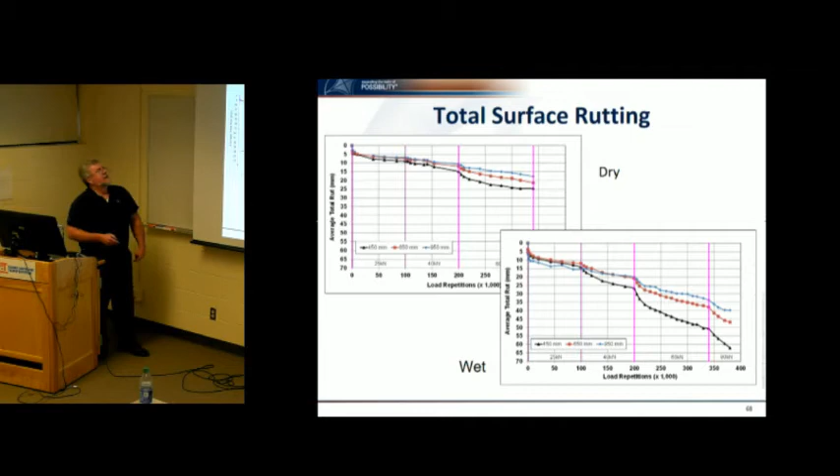All right, so we measured the rutting, then developed rut models for all of this. Since this was done in conjunction with the ASCE design standard, we used normal methodologies to look at stresses, strains, and accumulations to come up with rutting predictions.

They built a design tool you can Google and download to use for permeable pavement design if you wish. But I'm designing a standard for the masses—giving it to people who aren't pavement engineers, so they want something simple to use.

So we took the whole model and turned it into a simplified design process. We make you pick how much traffic you have, what your subgrade modulus is, we look at the contributing area drainage ratio, and how many days the ground is wet, etc.

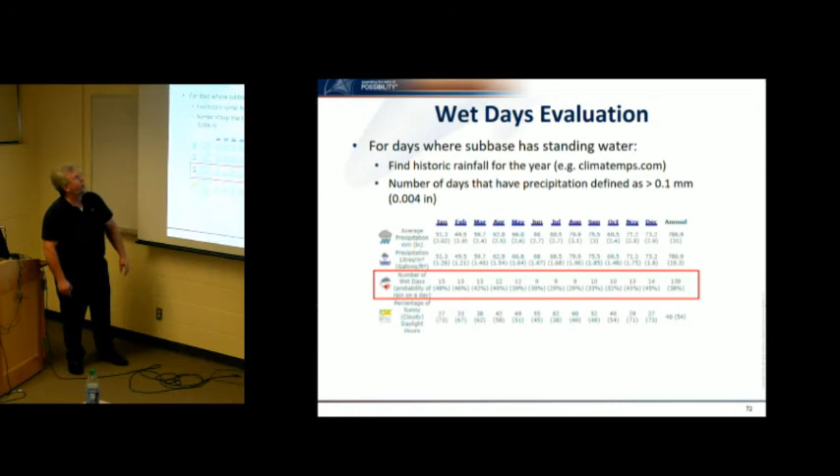We look at data from NOAA's websites to find out how many days a year there's potential for a wet subgrade. We also determine the infiltration capacity of the subgrade—if water goes right into the ground, I don't consider it wet. So we look at the drainage capacity there.

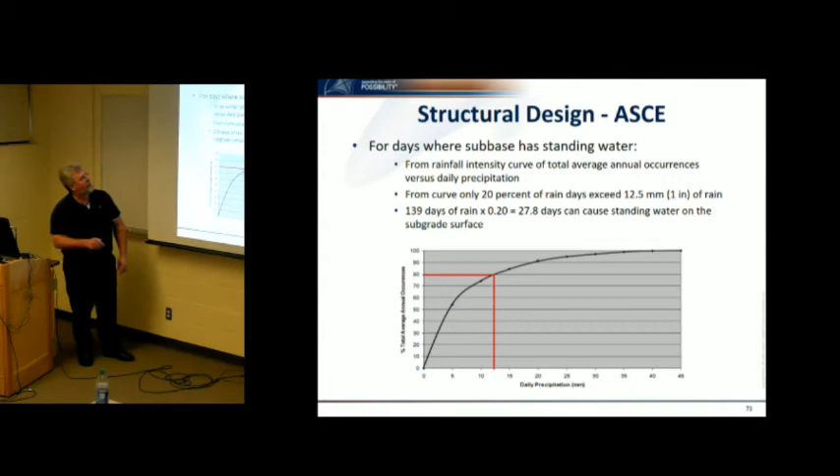We look at the number of days per year with precipitation over 12.5 millimeters, and what percentage of the 365 days that represents. In this case we calculate 28 days of standing water on the subgrade. We plug that data in along with traffic data and days of standing water, and based on the resilient modulus of the subgrade, we calculate the required subbase thickness.

Permeable pavements basically come in three types. Pervious concrete will be somewhere between 5 and 7 inches thick, maybe up to 8. Asphalt layers are usually no more than 2 inches, but sometimes up to 5 inches in thickness.

Pavers are always pretty much the same. They all come in only metric, 8 centimeters, 80 millimeter pavers. And then they all get put on top of a granular base, about 4 inches thick. So the only thing we need to know is how thick a subbase do I need to handle the strength, the load.

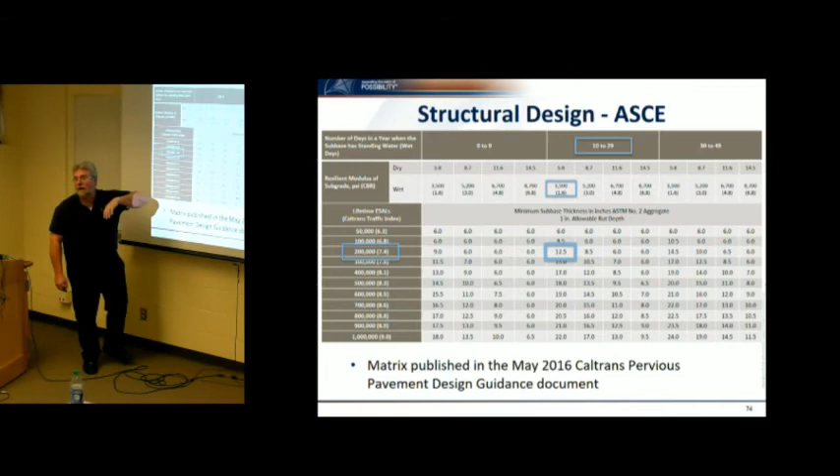This is basically a subbase table. Higher traffic levels, more subbase needed. Higher number of days that are wet, more subbase needed. Different subgrade strengths, more subbase needed, et cetera. So these are the design tables that are in our standard that you'll see coming out in probably a couple of months or so.

In terms of structural design, I mentioned already, honestly, you can design permeable pavements for anything. So the story with this guy, this is the Battle Command Center in Colorado Springs, Colorado. I got a phone call from a local consultant. The Army Corps of Engineers are building this Battle Command Center. Basically, it's a place where they got guys coming together to work, to train, and all this kind of stuff.

The Pentagon says that all new infrastructure needs to be designed to be LEED Silver certifiable. So by sustainability standards, you got to be LEED Silver certifiable, and 25% has to be certified. So they want everything green. So these guys looking at this Battle Command Center say, well, how can we be green here? It's Colorado. Colorado's got not a lot of water, but they're a very green bunch of people. So let's build the main pavement area in front of the command center to be all permeable pavement.

So that's fine. I get hired to do this. Design a pavement structure, no problem, send this thing in. Then they come back and say, well, you know what, it's not a big enough area, so we're going to actually design this entire, almost like a parade ground area. We're going to design it all permeable pavements.

And we want you to design it so that we can put our tents out there, and we want to take tent spikes and pound them through the pavement structure. Okay, so I said, then you're going to go pavers, because you're not going to put a hole in the concrete, a hole in the asphalt. So I said, you're going to go pavers. And he goes, okay, and I'm going to give you pavers that have holes that are about that wide in the corners, in these individual little corners here, so you can ram your spike in there. Okay, cool. Oh, but we want you to make sure they can handle these Abrams tanks.

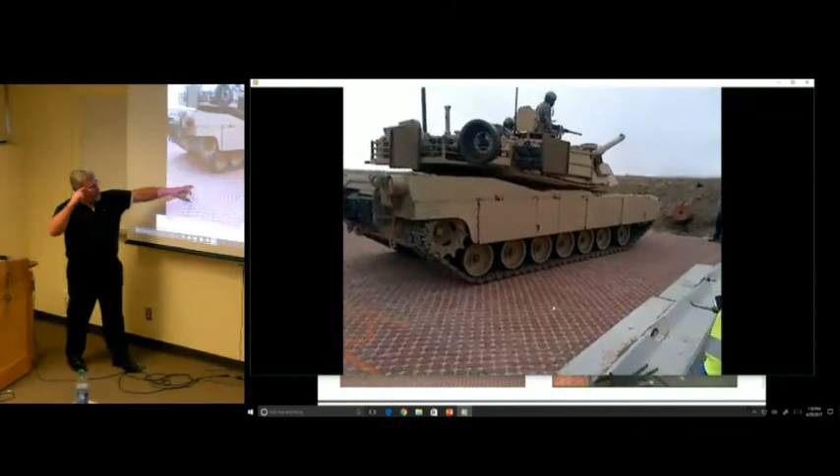All right, so anyway, this is the tank driving around on the top of this permeable pavement. There are some things on the surface that look like it's carrying something up - it's actually the rubber on the bottom of these tank treads. This stuff comes off the tank tread, carrying it off the bottom.

And then somewhere back here, they put in these spikes about that diameter, solid metal, and he drove over them. Then he goes, okay, so now how are you going to fix that? One of the contractors comes out, pulls it out of the hole, kicks some of the stone back in - here you go, it's fixed.

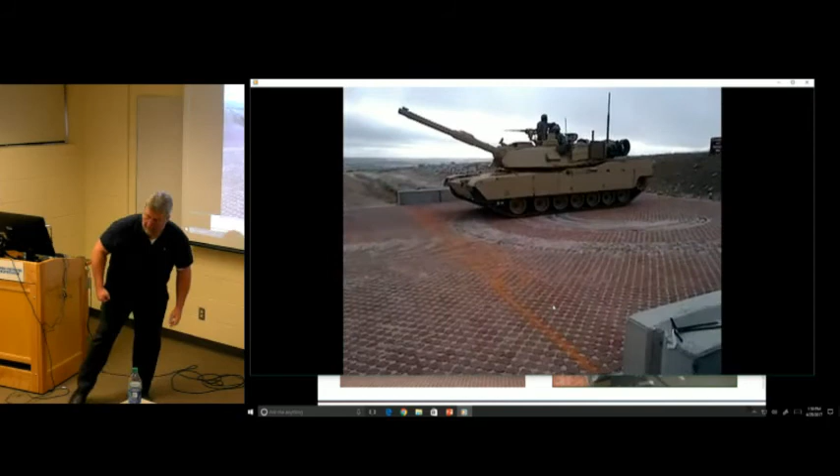So he loved it. And this guy came in with his tank, came driving in, hit the brakes. The gun goes down like this, almost hit the front of it. I went, oh my God, the concrete around here cracked.

Oh, there, right there, see the spikes? Here and here? He drove over them, bent them 90 degrees, and then we pulled them out, and everything was fine. And what you're not hearing here is a whole bunch of old Army Corps of Engineers giggling, because they're going, that's awesome, look at this thing. And they're laughing like hell.

And so here he's going to drive over one of the tent spikes. So anyway, like I said, you can design these things for it, but I wouldn't get your normal geotech guy to go and touch this kind of thing. You need somebody who knows something about permeable pavement stuff.

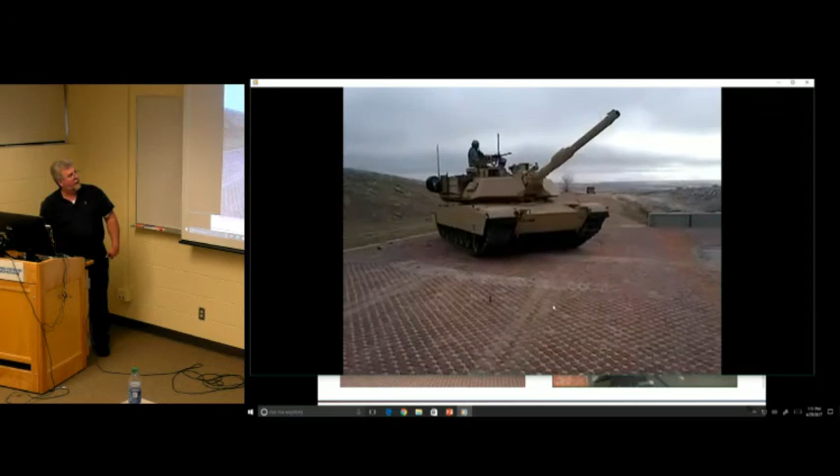Let's see if I have several videos of it, so I'm not sure. Oh yeah, there you go. Watch him, he's going to drive over that spike. Crunch, bent it in half, and the guy went out and picked it up later and took it off.

All right, I'm running out of time here. So some other things we need to deal with, all right? When I went to university, I was really good at water - stormwater, water management, anything to do with water. All my courses I was getting 95, 96, 97, never worked in water my whole life. And so now all of a sudden I get to work with water guys.

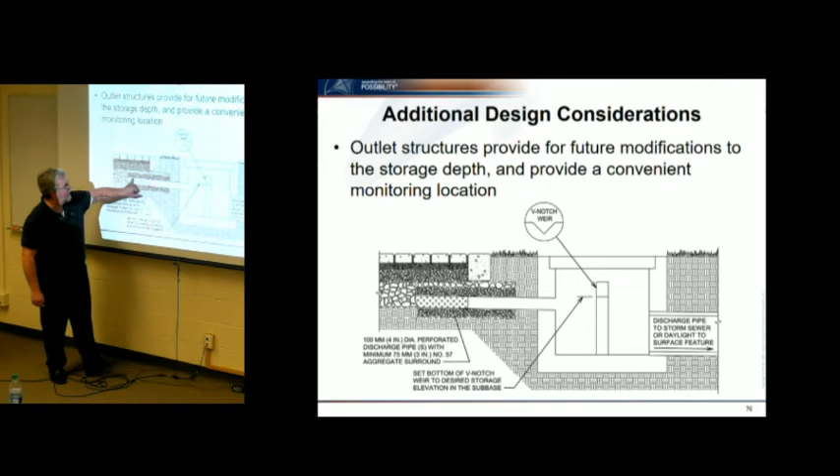And this is cool, I can actually use something I learned back in university many, many years ago. So this is an outlet pipe from the pavement structure going through a weir that's going to dictate how high the water needs to get before water will be allowed to get out of the pavement structure. That's just kind of a typical detail.

Slopes - we put berms inside of slopes. We do this a lot in alleyways behind places like Richmond Virginia, Chicago, all over Boise Idaho. A lot of alleyways are made from permeable pavers because you don't want to be digging down - there's nothing to put the water into, there's no storm sewer down there. So they use them as a conveyance method to get from A to B, not trying to get water in so much as to control it and take it somewhere.

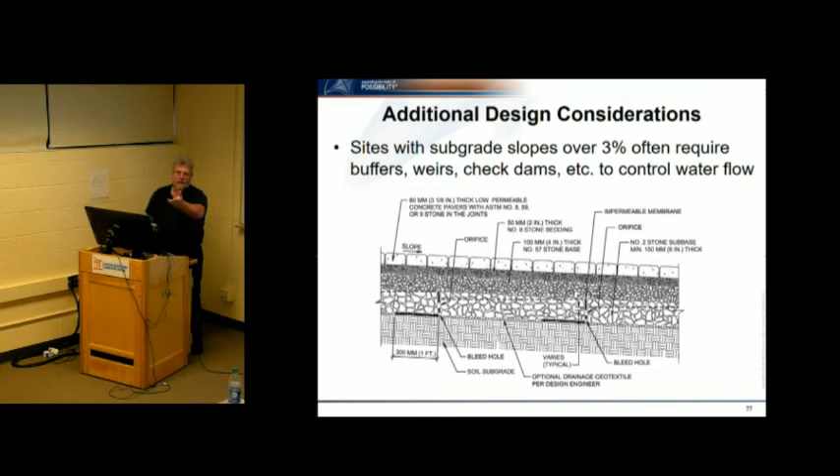Stuff coming off of roof drains - another detail for that, not really a great idea quite frankly. A lot of people want to do this. Where was it - another city in Colorado, Longmont, Colorado. I designed one that had 30 times the ratio of surface area impermeable to permeable.

All the water in all the buildings downtown went into the drain pipes and then went into the permeable pavement structure. That's pushing it quite a bit, and we don't want things coming off the roof like sand from shingles and this kind of nasty stuff. So you really don't want that to go into your permeable pavement. If you've got something like this, it can go down there. You can do the traps and all that kind of stuff here too, but it's not desirable.

We had this in our standard. We had a ballot vote on this a month ago, and we decided to remove it. We're not putting it in the standard at all - not saying it doesn't work, but it's not great design practice.

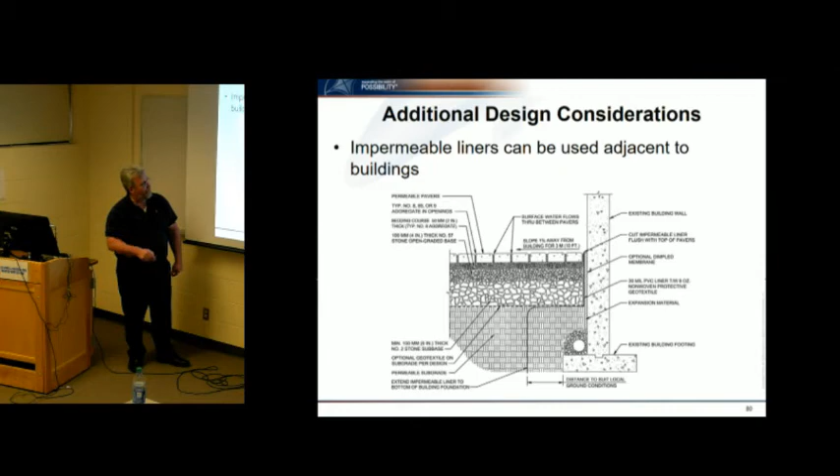Being beside buildings, you don't want water going into foundations, so we've got a cutoff here to prevent water in the permeable pavement from getting back underneath the building foundations. At transitions between other pavement types, dense graded to open graded and things like that, you don't want water going from your permeable pavement into the one adjacent to it. Use of geotextiles and things like that.

Here's the design. I said we don't put it up into the aggregate, we put it down in the subgrade, the drain. And then you may have a geomembrane, you may have a geotextile, adjacent to things like curbs or buildings, and even the soil down here potentially as well.

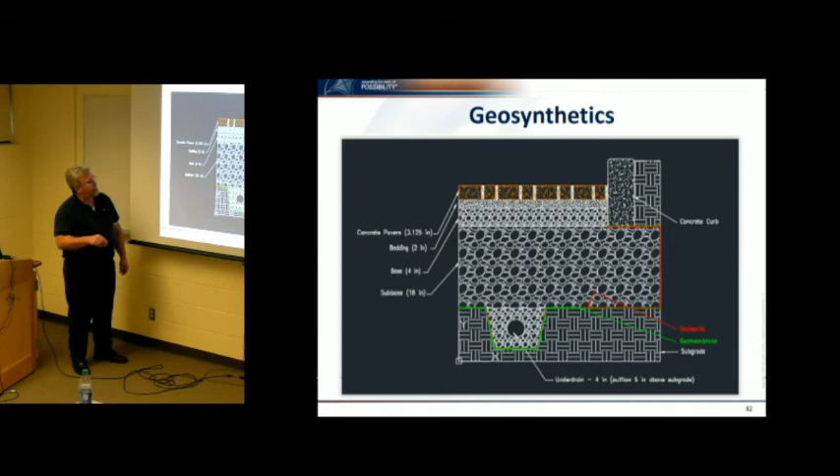So this is a detail that comes from that software program. Once you design it, you can hit AutoCAD and it will send you an AutoCAD drawing of your pavement design. I won't go through all this, it's all about geotextiles and the thicknesses and things like that of what you need. So a bit of things to learn a little bit differently.

Test results - this is basically just parroting back things like permeability and porosity and structural coefficients of layers and whatnot. Again, I won't bother with that. And then we look at what's it good for?

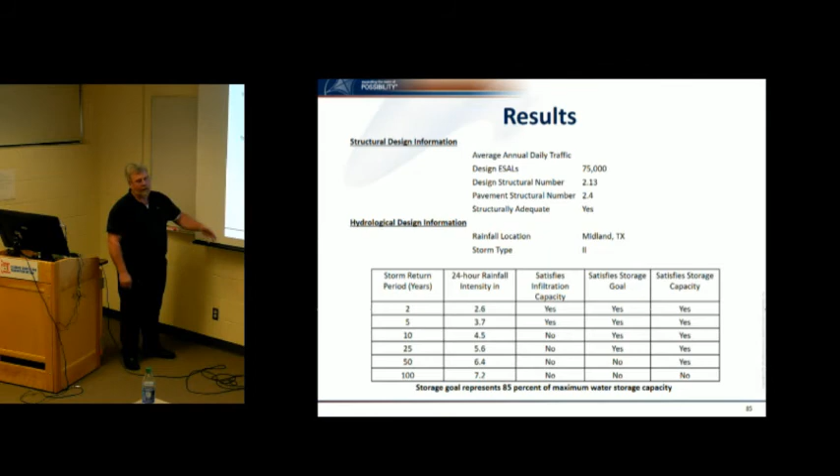Is it satisfying my storage capacity, my storage goals, my infiltration capacity, my rainfall intensity, et cetera? People have different goals. So I just show that to give you an example - this pavement works for everything up to a 5-year design and it's not working for this. That may be important to you, it may not be at the end of the day.

And so this is our output again - different design storms, different infiltration, different water going into the ground and stuff like that. This thing lets you walk through and design a permeable pavement right through from A to Z at the end of the day.

Subgrade considerations - you don't run your construction equipment like crazy over top of this and compact it if you're trying not to compact it. Infiltration testing is necessary to measure.

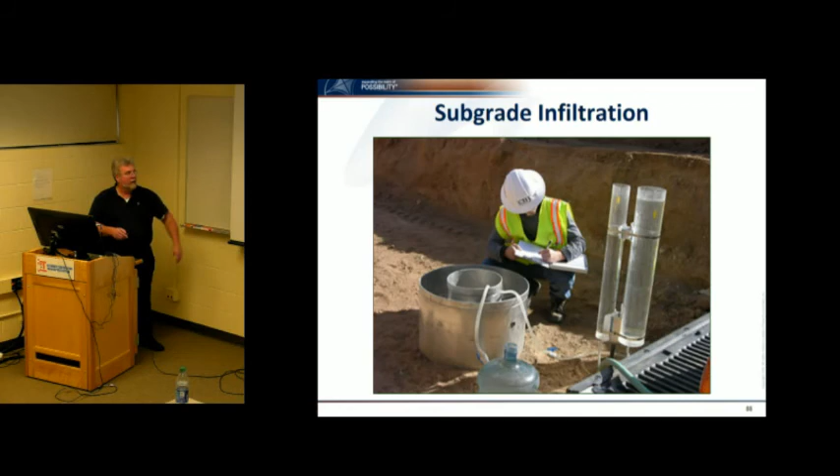We need to know what it's going to be like in a greenfield site. If we're out in the middle of Berkeley, California, we dug a test pit in the existing roadway and did infiltration testing at the elevation of where our new pavement was going to be. So a double ring infiltrometer test here.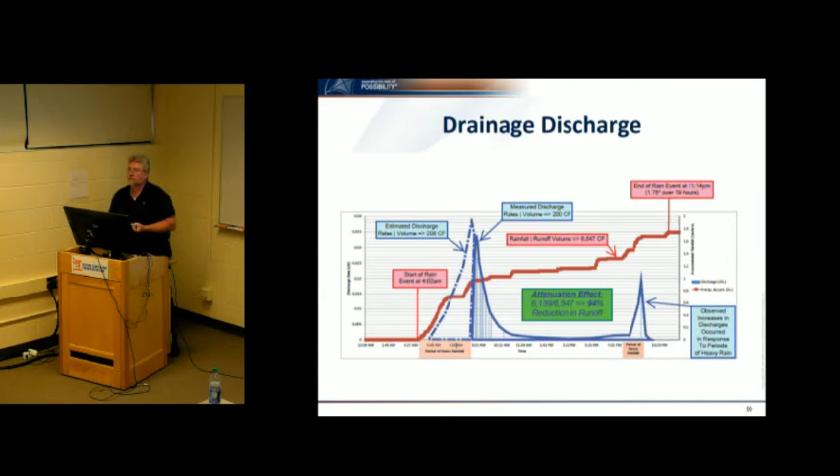This is the actual results of Berkeley. 94% of all the water that landed on that roadway or came through that roadway never came out the other end. So we had a 94% success rate removing water from the pavement structure, infiltrating it into the ground. All of the water from that site eventually ends up in one catch basin on the adjacent street. We wanted to monitor it for quality and quantity, and we haven't been able to get any water worth beans out of it to test for quality of water, because it's all gone. So that's the ultimate in quality improvement as well, ideally, because it's not going into the storm drain system.

A little bit about construction. This is the construction site at Berkeley again. This is our sub-base. They didn't know about some gas mains in here, so we had to change it and use some cellular confinement stuff, but ultimately we built the pavement structure.

Sub-base looks like railway ballast. Base looks like 1-inch minus material. Chip material - these two go in asphalt and concrete. This goes in the permeable pavers as well - that's the chip that goes underneath as a bedding layer and also in the joints.

Installing and doing base testing - if you ever see anybody that says go out and get 95% standard Proctor maximum dry density, tell them they're stupid. You can't do that, because you can't put a nuclear density gauge and stick a probe into open graded aggregates and get anything that's meaningful. It's a waste of time.

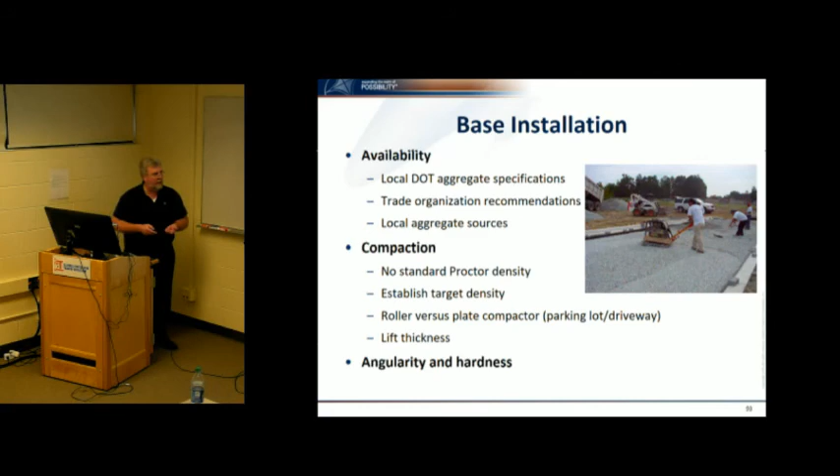And so usually it's done by a test strip method. You basically go back and forth, you measure density, you could use a back scatter on a nuclear gauge, or we specify how big the equipment needs to be, and then you can do a test strip kind of thing. This has become much more popular for compaction assessment - the LWD, lightweight deflectometer.

The thing that pisses me off about this, I was telling one of the other students earlier, we're talking about FWDs, falling weight deflectometers, and I said the first one I owned was serial number 4, the 4th one ever produced on the planet was mine. So I've had a lot of experience with this. When I saw that back in the 80s, I said we need a portable version so we can take this to Africa and other places. I wanted this built 40 years ago, and it took like 25 years before anybody started doing that, which was crazy. Found great success with this.

This is what's in our standard. We wrote the spec for the compaction testing in our standard based on the LWD as well.

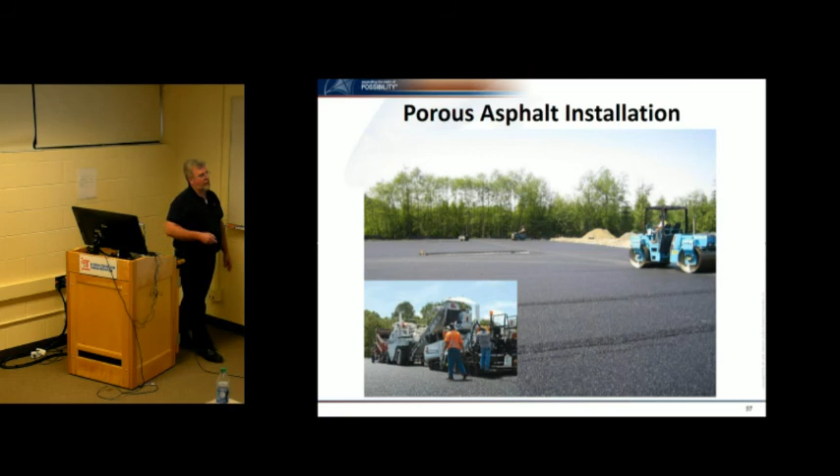Porous asphalt installation - the big thing about this one is getting it at the right temperature to get it compacted properly. This goes against dense graded asphalt, where we want it as dense as possible to make it as strong as it can be. So ultimately we want to make sure this is relatively strong as well, but the temperature is really important.

Concrete, we need to get it built and the cement hydrated so we get decent concrete. This is from a parking lot across from my office in Toronto. Covering it up really fast.

This is a floor spreader that's used to construct the surface, and you can lay it with big machines as well. So this is a larger machine.

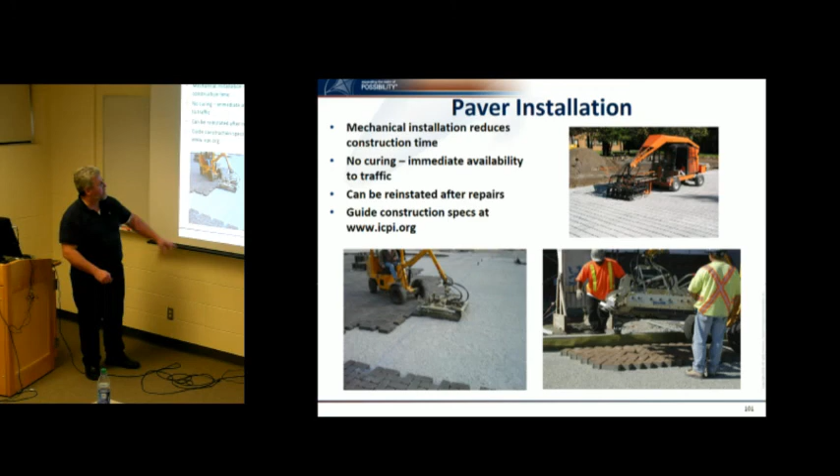Pavers - they have these devices here that can pick up a square yard of pavers. They could complete this entire room here probably in 20 minutes, and we'd be finished basically laying these things down. So there's clamp systems that pick them up and lay them down on the pavements. This guy's basically just spreading aggregate into the pavers and compacting it to give it its shear capacity.

This is a parking lot for a liquor store down in North Carolina. Yeah, I was the guy taking the picture.

This is in Omaha, Nebraska, Zorinsky. It's a park area kind of thing. Underneath here are these guys, so when the water gets in here, it can't get into the ground here, it goes into here and ends up in these pipes out down the trench in the back here.

Walkways - go down to Colorado Springs, you'll see lots of this. Trees love this. I've always been asking the botanists and arborists if they like permeable pavements, and they absolutely love them because they're open spaces. The roots go into the open spaces, it doesn't lift the sidewalks. Also, they've got access to water, so they're really happy.

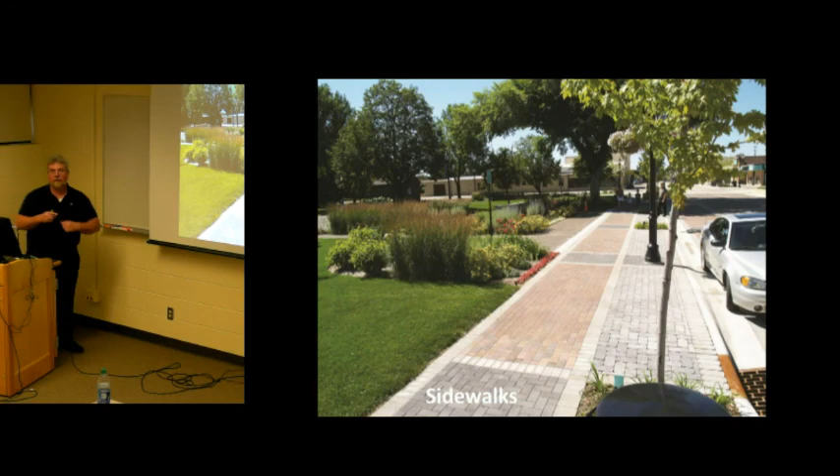The canopies in Berkeley are bigger, and there's another one for you too, Hassan - the improvement in the canopy of the trees resulting in better oxygen production, that's another good one. Yeah, we've come up with a couple of new ones today.

Roadways - that's a roadway out in New Hampshire. Nice thing about it, no water spray, because the water basically gets sucked into the pores here. It's quieter too, quieter to drive on.

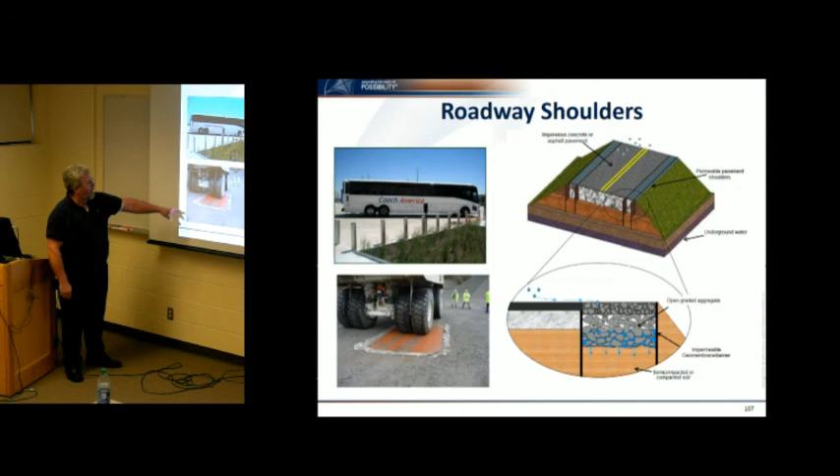Roadway shoulders - Caltrans is doing this, or wanting to do some of this construction, build them beside the road. Heavy vehicles, that's one from the UK, doing some test sections. This is from my NCHRP project, so it's like, how would you actually build a permeable shoulder on a roadway? And we came up with several different methods of doing that, how would you do it in an urban section versus a rural section?

So again, just a few details, a little bit of maintenance and I'm done. So a little bit of maintenance. This was that...

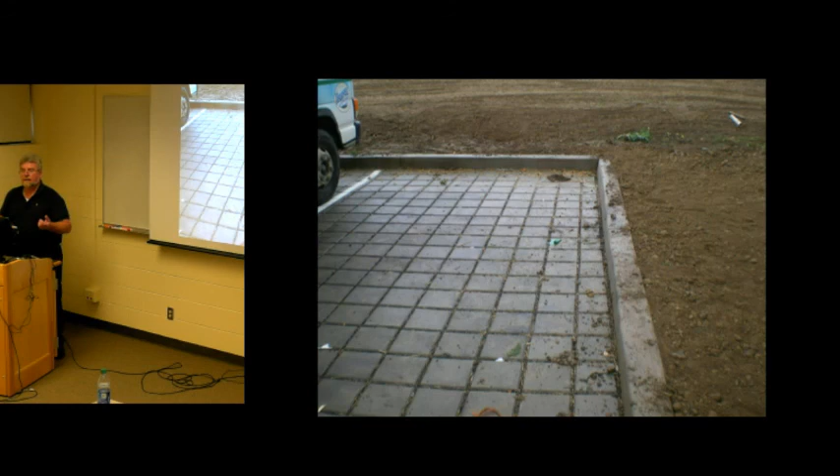Place out in Portland, Oregon, where I was there before they opened it to traffic. So I'm walking around taking pictures of the permeable pavement, and the landscape guys came in, dumped all this subgrade or topsoil here, picked it up, and were planting the trees. So I'm taking pictures of this, and the guy says, 'Oh, you know something about this? That's a funny looking pavement.' I explained what a permeable pavement was, and he goes, 'Yeah, it's probably not a good thing for it, right?' So the landscape guy's dumping dirt in the middle of the pavement. So I said, 'Didn't somebody tell you about what this thing was?' No, I didn't know anything about it.

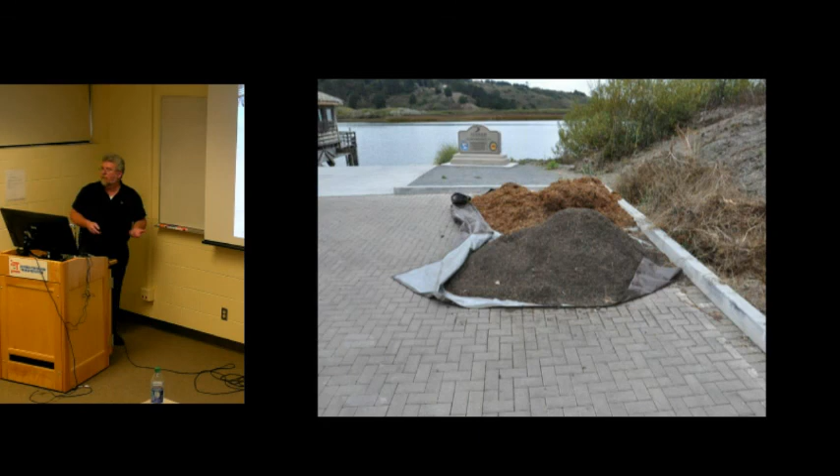That's at the Russian River Valley out in California. I drove by that, and of course I turned my car around. My wife said, 'Now what, another permeable pavement?' Yeah, I got to go take a picture. And so this was somebody else doing some maintenance, basically putting a tarp down and putting the junk on top of the tarp, which was really good. What we don't want is things getting into the joints and growing.

This is my Olympic Village job up in Vancouver. I was brought into this job because the supplier was unhappy about what they were going to do. I reviewed what they said and gave them a report that says, 'You guys are nuts, man, don't do this.' Then I walked away because they wanted to hire me and I said, no, you're not going to listen to me. I said I don't want my name associated with a failure. Eventually they called me and asked what my terms were. First time in my life a client asked me what my terms were.

One of my engineers sitting in front of me said, don't do this, I know you're going to do it anyway. I said, it's the Olympics, man, I got to do this. So I gave him the terms: I needed three weeks to review and change all of their designs, I wanted to work directly for the city, and I wanted one of my people on site during construction. It was a complete disaster.

From day one they started screwing stuff up. Underneath there is a permeable pavement. I said, it's permeable pavement — no dirt, no water, no heavy trucks, no nothing. That's exactly what they did. I said, really cool, well, where's the permeable pavement here?

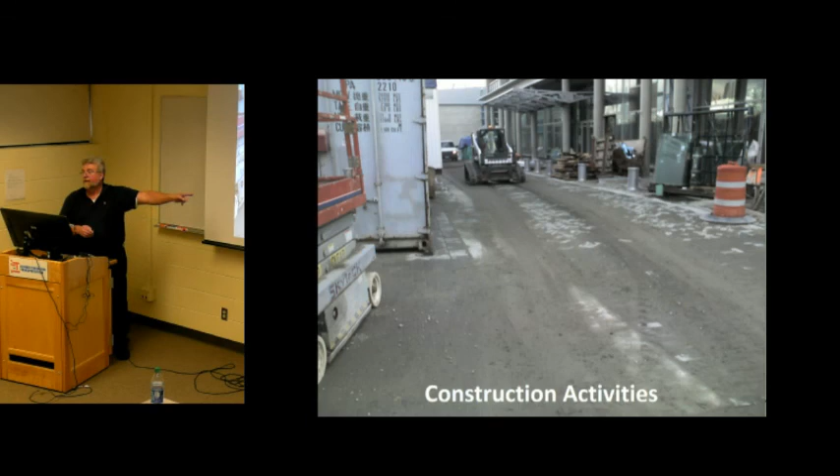This is during construction. We wrote hundreds and hundreds of defect notices. After the Olympics, I went back and we did a punch list of what had to be fixed. I stopped counting at 300 items. I said, guys, this is ridiculous, just rip it up and start over again. It was so bad. So yeah, people don't listen. That's okay — if they listened, I wouldn't have a job, so I'm fine with that.

You can actually suck the clogging material out of permeable pavements using a true vacuum suction device. It works better on pavers than on asphalt or concrete because pavers have fewer voids at the surface, so the vacuum can get a decent seal.

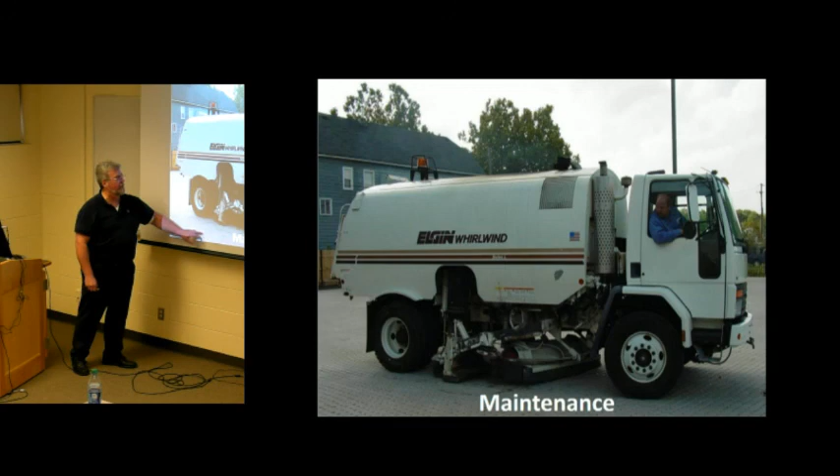Winter maintenance is just like anything else. We did a demonstration project on winter maintenance at Fort Collins, and it snowed that day. It was really neat because the heat from the earth below comes up through the joints and actually melts the snow faster than a regular pavement would.

This is our ASCE standard coming out. It consists of a committee of about 23 or 24 people, half water people, half pavement people, and we've been arguing with each other for a long time. It's interesting — the pavement people argue about pavement design, and then the water people laugh at us saying we don't know what we're doing. Then the water people talk about their orifice equations and stuff, and I'm thinking, you don't know what you're doing either.

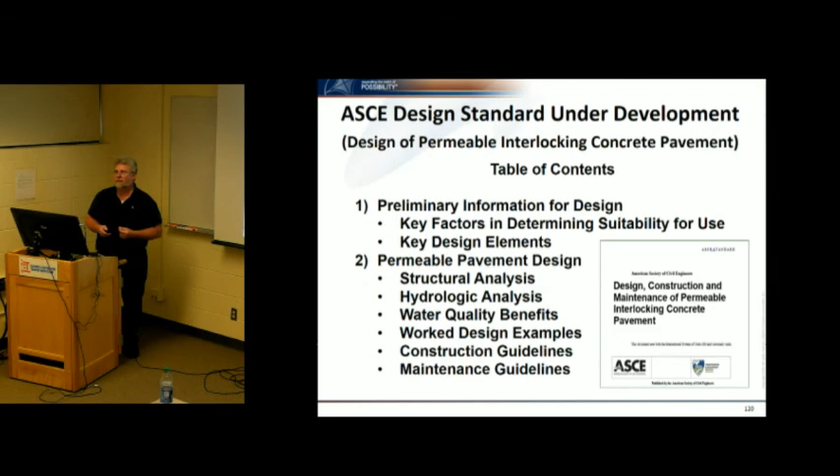Yet we all came together and we're writing a national standard, an ANSI accredited standard. So remember, some of these standards come from engineering opinion. This is where we are — we've got a ballot finished, it goes to the public for 45 days, that's coming up shortly, and then mid-2017 we're going to publish it.

So that pretty much takes care of the permeable pavement stuff. Since we started late and I talk long, we don't have a heck of a lot of time left, I think.